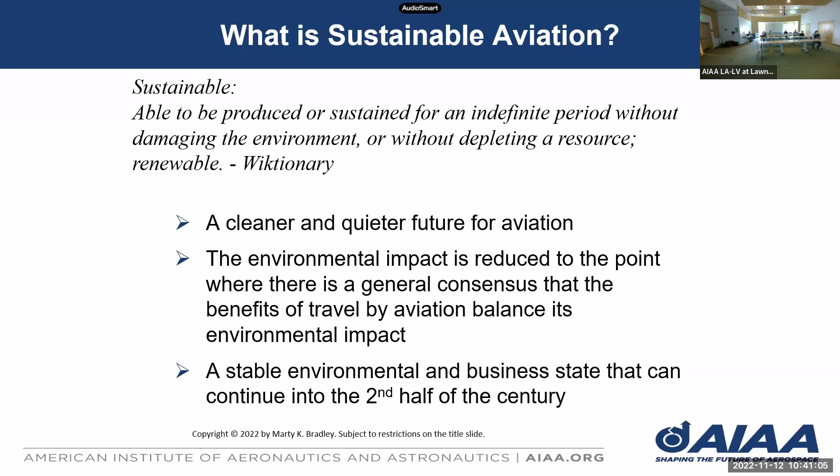Things like flight shaming are real, right? People are out there saying you should not be flying, it's bad for the environment. There's a lot of truth to that, and we'll get into some of that. The pressure's there, you see it in the news every day. There's a worldwide climate summit as we speak, they're setting goals, they're trying to figure out ways to reduce the environmental impact of everything, reduce CO2 and other greenhouse gases.

So a lot going on. Certainly plenty of pressure to say clean up our act.

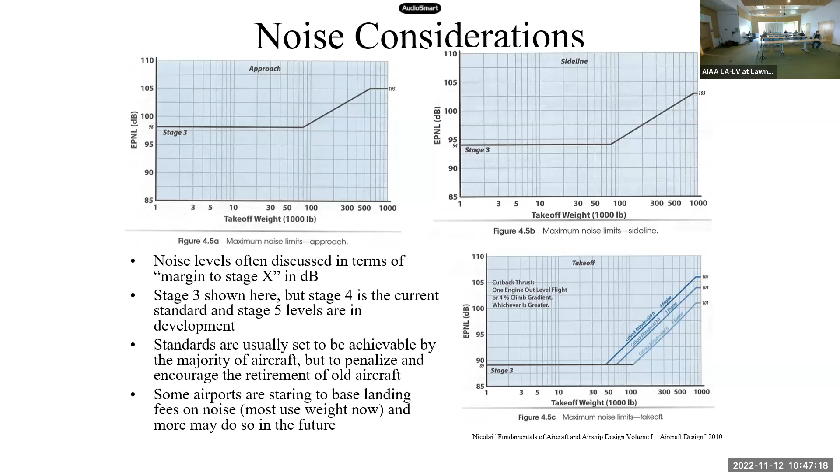Now we're talking about Chapter 14. So again, what they're doing is trying to essentially decrease the noise of the fleet. They usually do that by only identifying a few noisy outliers and putting those above the line, so they're not trying to force the entire industry to swap out their entire fleet, but trying to get rid of the noisiest airplanes over time. That's what happens when you have an industry group setting the standards.

There are some individual airports that can set more stringent standards and require other things - like Orange County Airport has additional restrictions. Some airports restrict the time of day that airplanes are allowed to fly. So there are more things some airports can do, but generally these are the rules.

So new airplane design now is going to have to meet this - going into service would have to meet this Chapter 14. And there'll be another one, right? They'll get quieter as older airplanes die out in the future, so there'll be new noise standards.

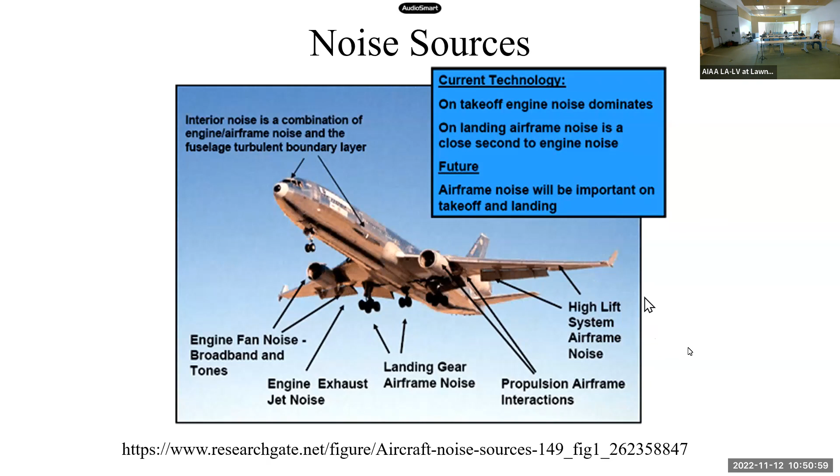There's a lot of noise from the difference in two velocity streams against each other. So if you can mix it out, then it won't be making noise anymore. So you see these kinds of features on jet engines.

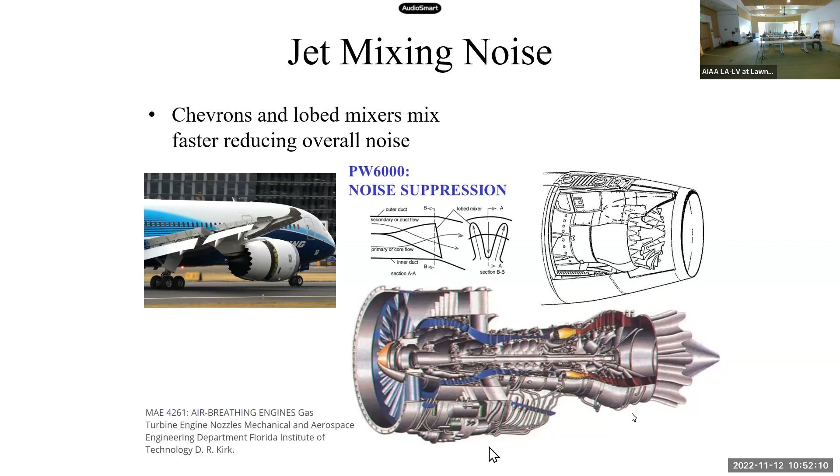Interior noise is important. There are communications that have to go on in the cockpit. The pilots have to be able to talk to each other. In the cabin, passengers want to be able to have maybe not a completely normal conversation, but some kind of conversation that goes on. You need to make public address announcements. Even though flight attendants are great at reading lips and things, it helps so they can actually hear you,

as well as it's just more comfortable to not have a lot of noise. Some of the sources of noise inside the airplane come from the outside, the flow around the outside of the airplane. The engines, obviously, are a source of noise. The air conditioning system inside an airplane, the flow of the air circulating in the cabin can also be quite noisy. Those kinds of things.

Okay, so just a little bit on how the noises vary. We'll see if this works. We've tried some of the audio-visual things, and we tested this out and looked a little bit earlier. We'll see. But this is the difference between a fan and a propeller in terms of the kinds of noise it makes. If you're a noise expert, you get very good at hearing the different frequencies and understanding what they are. But for the rest of us, it's kind of a black art. But let's show you a couple of examples.

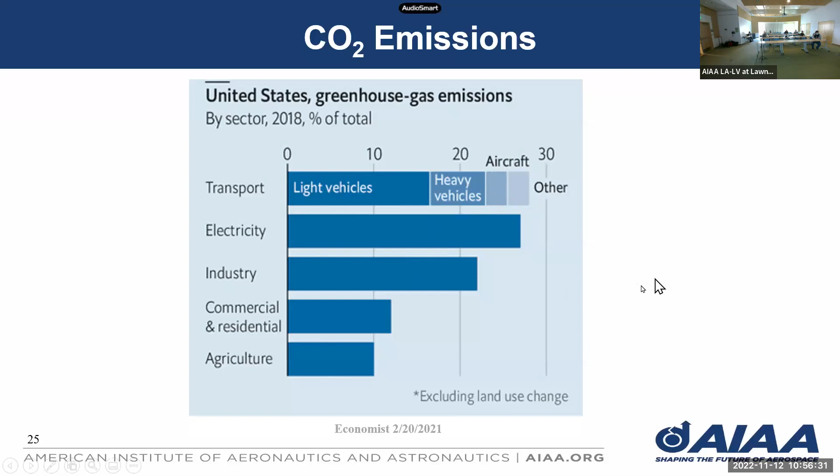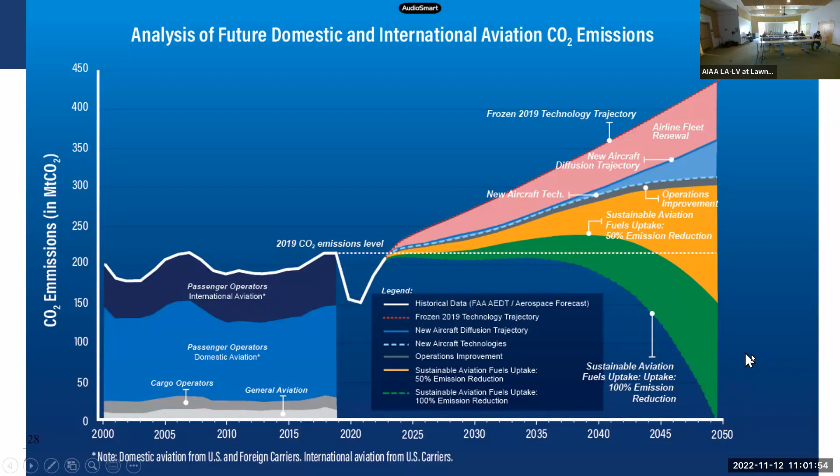Other developing countries are a big deal as well, so everyone's got a part to play. I think that's the theme they're trying to talk about at the climate summit they're having currently. Lots of things going on, including poor developing countries wanting rich developed countries to help them pay for becoming more environmentally friendly and fuel efficient. So a lot of things going on, but you certainly need China and the U.S. and everyone to do something. Everyone's got a role to play in this. It won't be successful if any of the big players are not fully engaged.

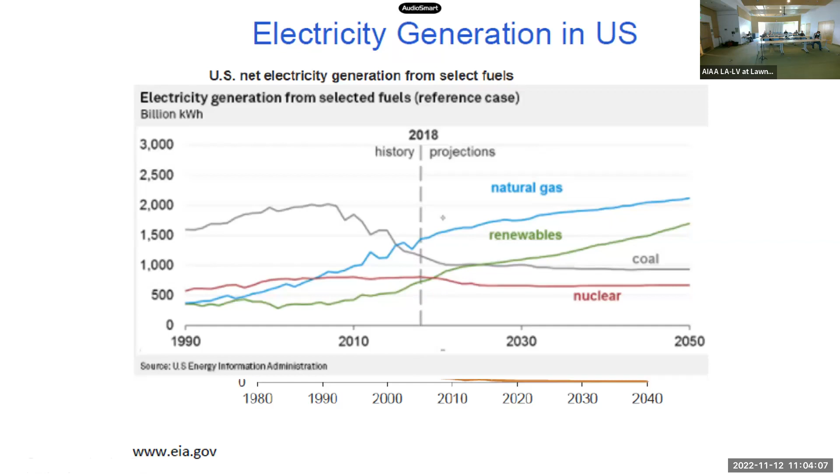If nuclear could ramp up, that would help some of these other things. But that's kind of the way renewables look. I think the next slide zooms in on renewables in the U.S.

One of the important implications over time is the cost of all these renewable energy methods of generating power have come way down, so renewable methods are now cheaper than conventional methods. That's a really good thing to have happen. You can argue that developing countries, it makes more sense for them to skip over coal and other highly polluting things and go directly to solar and wind. The issue being, how do you make a stable electrical grid when the sun doesn't shine? There's a lot of issues involved in that.

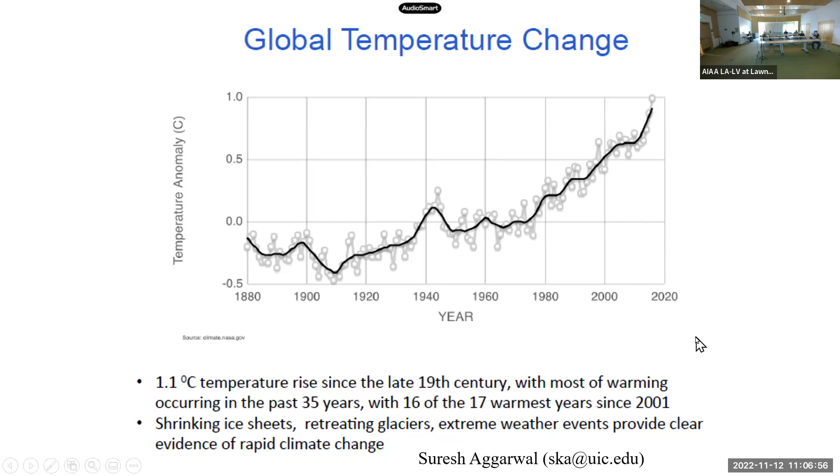We all talk about CO2 all the time, but it's not only CO2. CH4 is methane—that's also a contributor to greenhouse effects, to the rising temperature. We have...

One of the things they mentioned at the climate summit, I think yesterday or the day before, is the US is using their NASA satellites to identify methane leaks and emissions, which they will then try to stick somebody on to try to reduce the leaks, improve efficiency, those kinds of things. So it's mostly CO2, but the other ones can be important as well.

And there's different time frames, which we won't get too much into, but methane does not stay in the atmosphere as long. Carbon dioxide stays 100 years or more. So it's the hardest to deal with.

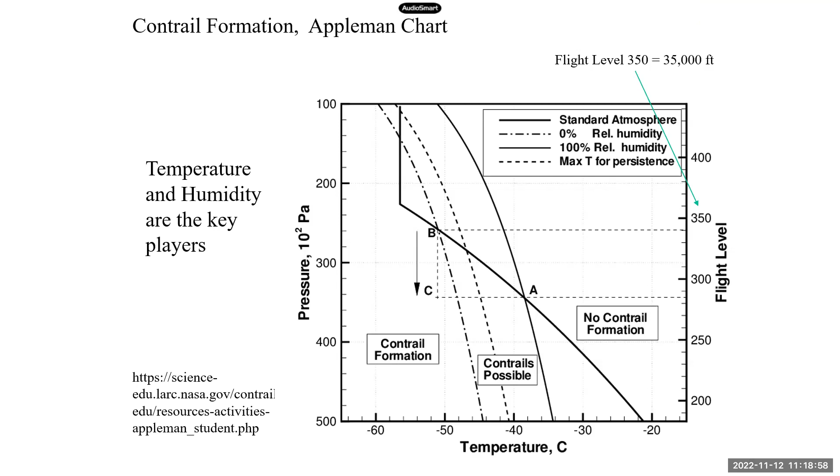Mr. Professor, what do you think about third generation microalgae in the oceans? We can think 3D, right? Excuse me for my English. Can you repeat the question please? What do you think about the third generation of microalgae? Sequestration of carbon in the ocean? Yes, in the ocean. We can think 3D, no?

Microalgae, yeah, I think we'll talk about that a little bit more later. That's one of the non-aviation ways of reducing CO2 in the atmosphere. If you use algae to capture carbon, when algae grows it's going to suck in CO2, and then you can use that as a feedstock for sustainable aviation fuel. So that's a possibility too. We'll talk about that.

Okay, let's see if this plays. We're not quite sure, this doesn't work. These are some videos of contrails and contrail activity. Thanks, sir.

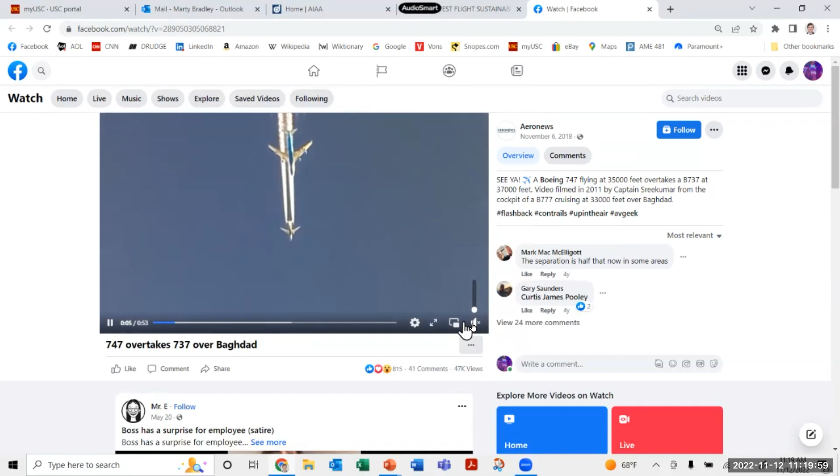Two of them, no? It's a 747. See how the guy is, yeah.

What we have here is someone in a 777 airplane taking a video above him, and there's a 747 and a 737 above, and they're making contrails. Here's an example of contrail formation, and the conditions are such that they're forming these contrails. One of the interesting things is how excited the pilot is. He's probably a 20-year experienced pilot, and he's seeing this, and he's pretty excited because it's very rare that you're going to see multiple airplanes all stacked up on top of each other. That's kind of fun.

That was one of the rarest. Okay, so, all right, and then here's another video. This one, if it works, we'll see how this works.

Okay, so I'll stop it. What you see here is two airplanes again. It's being viewed from another airplane, but this airplane is coming at us. The contrail does not persist. If it flies by, you can see the contrail dies. So it's an example that some of the contrails do not persist. It depends on the conditions, and these are all the things that you need to calculate to figure out if you're forming a persistent contrail.

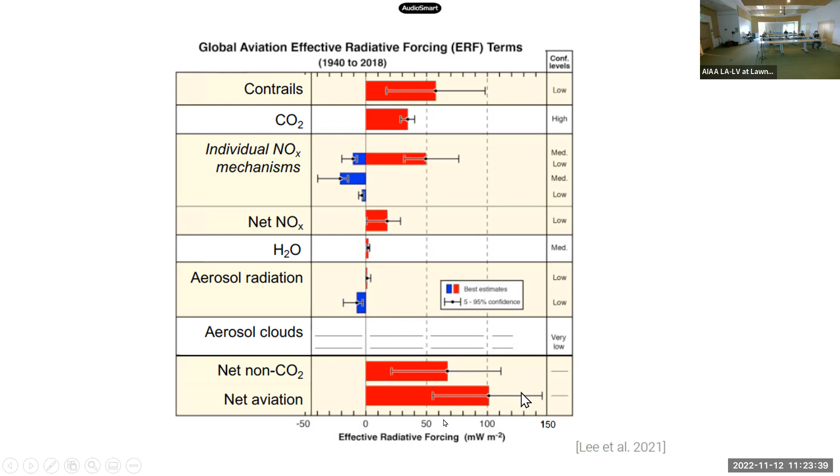The other thing that comes into play is a lot of short-range flights. If you're flying a few hundred miles, they may not ever get to the altitude where a contrail is going to be formed. So that would say some of the shorter-range flights, LA to San Francisco, maybe is not going to form as many contrails as a flight that goes across the Pacific, for example, which will fly at a higher altitude. So those are all things to consider.

This is one of the really good papers that was done relating to aircraft design and reducing the impacts of global warming. They called it global warming in 2011; now they would say climate change, most likely. A commercial airplane is typically designed to fly at Mach 0.85 and cruise at 37,000 feet.

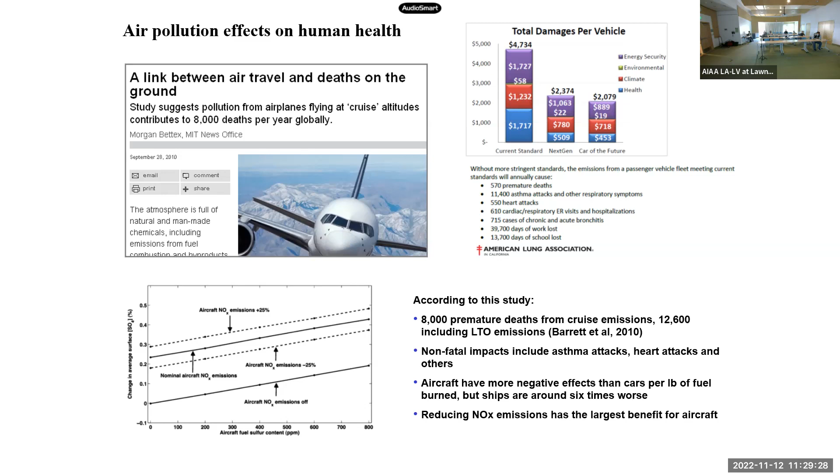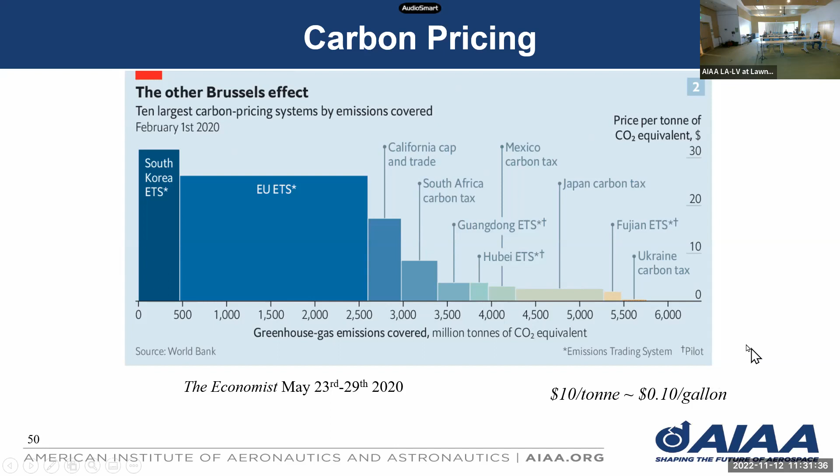Okay, so just an exercise. You may hear numbers flying around. One of the values I've seen recently is $30 per ton of carbon. What additional cost is that on a gallon of jet fuel? If you run through the calculations, it turns out that's about 30 cents on a gallon of jet fuel. So $30 per ton, or $100 per ton of carbon, is about $1 a gallon tax on jet fuel. And we're not at that level yet, so 30 cents isn't that big an impact. But in order to start changing the price of jet fuel, these carbon prices probably need to start—when they get higher, they'll have a bigger effect.

But some of the things you may see—there's a lot of work on different tax credits. There's taxes and credits, and all these things are being worked in different ways. A lot of policy activity related to sustainable aviation fuel. The current administration is pretty prone to working on these things, building these kinds of incentives into the Inflation Reduction Act and the other spending they put out in the last 10 years.

Let's talk a little bit about some of the technologies that we looked at. This is from one of the studies we did for NASA, called Subsonic Ultra Green Aircraft Research. We defined baseline airplanes in the 2005 timeframe, an improved version with new technology from 2030 to 2035. We looked at different wings, increasing aerodynamic efficiency, different shapes, and adding hybrid electric propulsion. Then we looked at even more advanced technologies that might be available in the 2040 to 2050 timeframe. So these are some of the things we looked at.

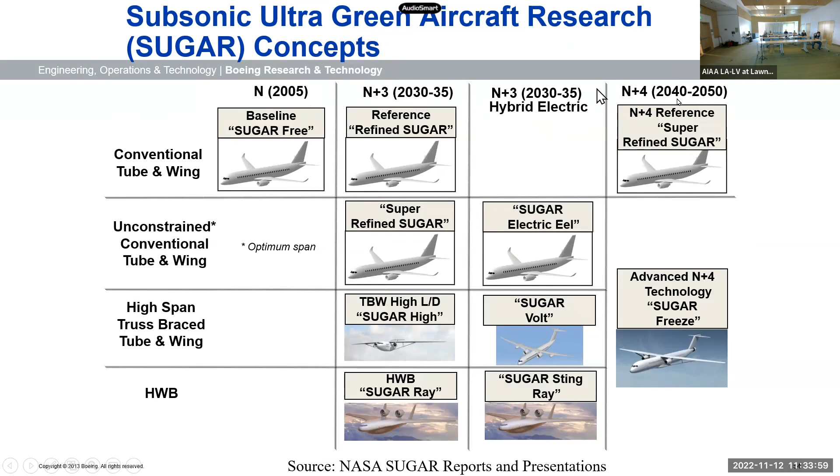And we defined these terms: N+3 is the time frame of 2030 to 2035, N was the time period of 2005, and N+4 was 2040 to 2050. So you'll see us refer to that.

But for some of the technologies beyond the N+3 technology, we looked at things like natural gas, liquefied natural gas, hybrid electric propulsion systems, advanced batteries, fuel cells, hydrogen, hybrids between fuel cells and batteries, and fully electric airplanes to try to do some of these missions. We've even looked at what you would do if you wanted to fly a nuclear reactor in an airplane, something looked at during the Cold War—what would have to happen to make that practical. I won't be talking too much about that; it has to get very light and very safe before that can apply.

We looked at some of these technologies in our different studies. We came up with these cute little names, like the Sugar Volt, the Sugar High, the Sugar Freeze. Those are some of the different things we referred to.

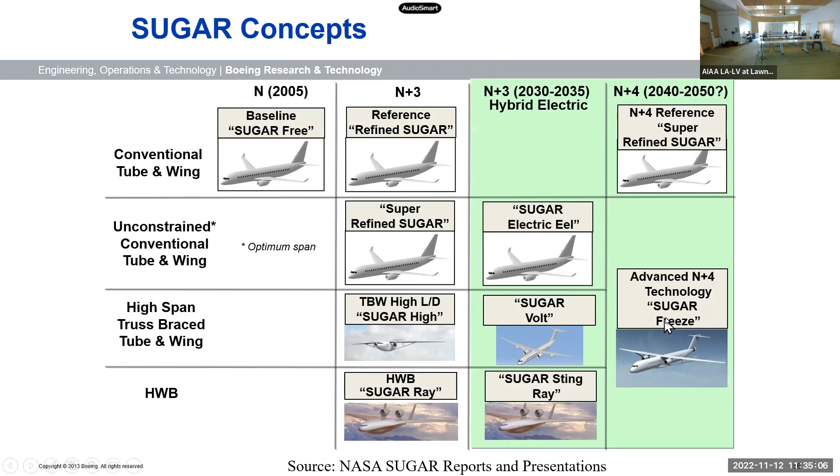Okay, so a little bit on fuel. Some of you know more about this than I'll show here, but the fuels are all about, let's review our chemistry a little bit. Hydrocarbon fuels are molecules that are mostly chains of carbon with hydrogen attached, and we'll see some of those. Carbon is relatively heavy with an atomic weight of 12, and hydrogen is the lightest with an atomic weight of 1. The energy you get by combusting one of these fuels, combining with oxygen, creates water and CO2. That's what releases the heat.

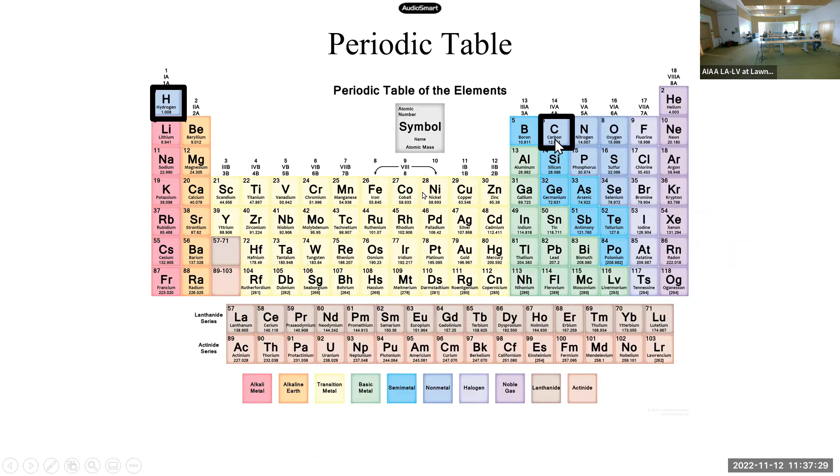So in deciding, if you're trying to develop something for aviation and moving toward hydrogen, hydrogen has good energy, it's lightweight, but it takes up a lot of volume. So that has a lot of impacts to the aircraft.

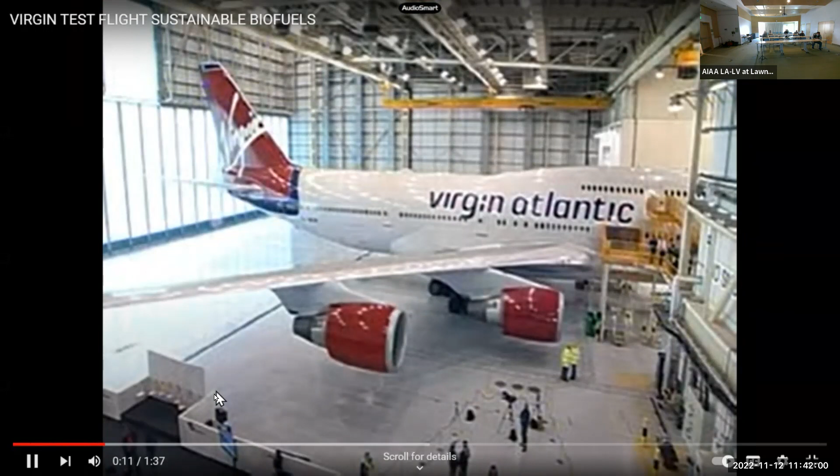It's a historic occasion. The Virgin Atlantic 747 behind me will fly using a biofuel that will come as a surprise to many around the world. Well, we've had a wonderful day today. We wanted to prove that a biofuel flight could take place, that a plane could fly at 30,000 feet on biofuel. People have always said that would be impossible. That has happened. And it's a historic day. We've committed to putting 100% of the profits from our airlines and our train businesses into trying to develop clean fuels, because the globe is being destroyed, and we've got to do something about it. Biofuels is one possible answer. Biofuels do not emit carbon. So over the last 2 years, we've been trying to prove the skeptics wrong. The airline industry emits about 2% of the carbon, and the carbon...

All right. I mean, a couple things, right? That was the first biofuel flight in a commercial airliner. It had a small amount of biofuel made from a babassu nut and some other things in it. Richard Branson exaggerated the benefits in some ways. He misstated maybe the chemistry a little bit.

Biofuels emit carbon because they are hydrocarbon fuels. When you burn them, you get carbon dioxide. We'll show though that the net carbon dioxide could be much lower.

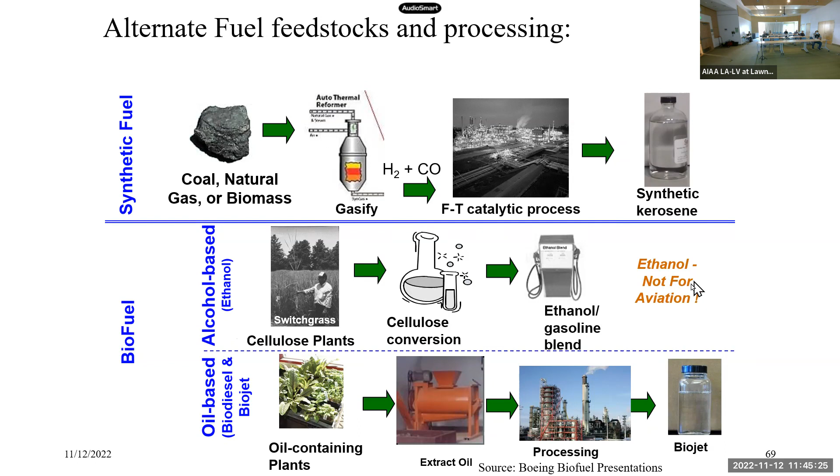I won't talk much about this. You can make an alcohol process—you can use ethanol and convert it into something that you can mix with gasoline. One of the problems with that is it doesn't take well to low temperatures that aviation needs, and the energy content is pretty low. So not many people are talking about using any kind of alcohol in aviation.

The Fischer-Tropsch process is mostly about what you'd think of really big refineries having—you've got the towers, you have tanks, you have all this stuff. It's processed in many ways. You're essentially making carbon monoxide and hydrogen, and combining them together into the fuel that you want. So it works, it's a well-proven process. It requires a lot of energy to do it.

And so we'll look at some of the comparisons. You can make a fuel using this process. If you start with biomass at the beginning, it's not nearly as bad. If you start with coal at the beginning, you're doing an environmental disaster, basically, if you're using coal to make some kind of jet fuel.

The advantage of using some kind of sustainable fuel from biomass is this: typical petroleum-based jet fuel, you pull it out of the ground, you transport it, you refine it, you take it to the airport, you fly it, you emit CO2, and all the energy used along the way to get it there essentially is more CO2 ending up being used. In a sustainable aviation fuel, you start by absorbing CO2 from the atmosphere into the feedstock, into the biomass. Then you refine it, process it, fly it, and burn it, and the CO2 comes out.

But you can argue it's a circular system and a lot of the CO2 gets absorbed again—maybe not the same CO2, but in the whole world it doesn't make any difference. The inefficiencies of each process mean that energy essentially is being used; it had to come from somewhere, so that could create CO2 itself. It's impossible for this cycle to be 100% efficient because all these steps have some inefficiency.

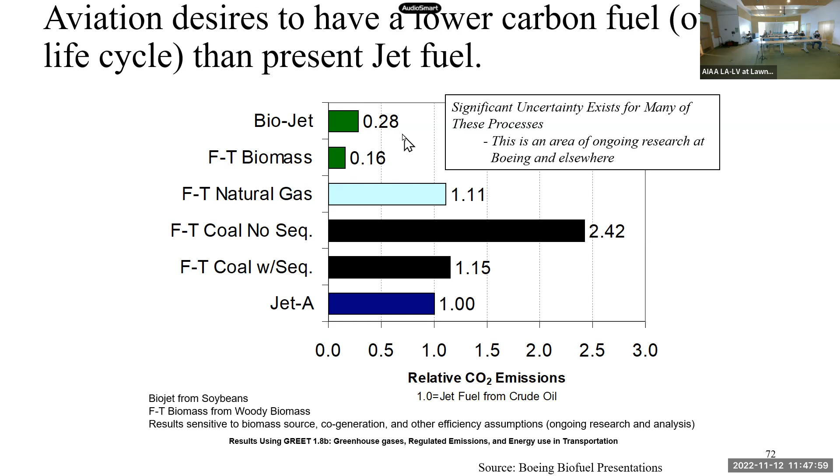Here's some comparisons of different ways of producing jet fuel CO2 emissions, with Jet A at the bottom using 1.0 for 100%. These Fischer-Tropsch processes with coal are terrible. Natural gas is worse than jet fuel. The biomasses are the ones that have the potential to really improve it.

Whatever you're doing, you can't have people cutting down the rainforest in order to grow this stuff. So deforestation is a big deal—about 25% potentially of global warming comes from deforestation. You don't want that to happen, so you don't want to do anything that encourages it.

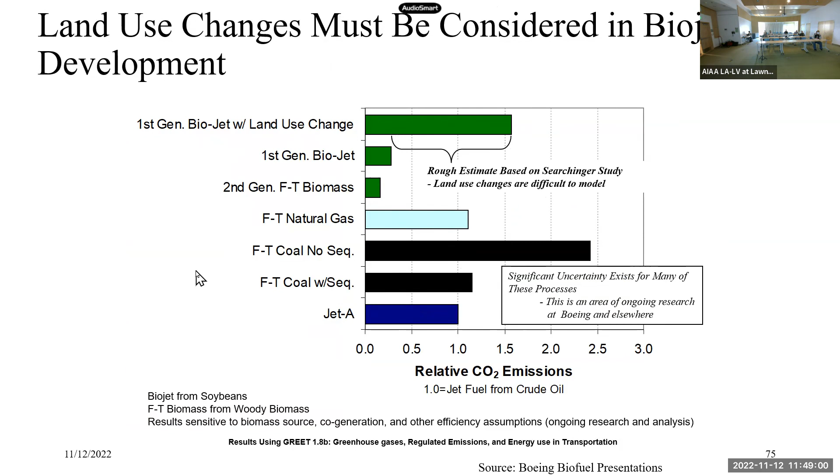We also looked at a saltwater plant you might use. You'd need something like the size of France. Still looks kind of tough.

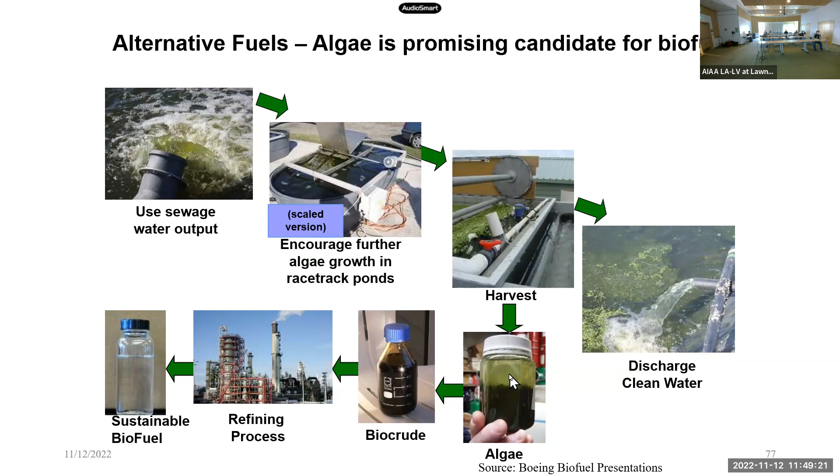Another thing we looked at is algae. Algae is a way you grow it in water—maybe bad water, maybe wastewater or salt water. That seems pretty good. You can create this and refine it into sustainable fuel.

Some studies showed if you had offshore algae farms, you might be able to get by with an algae pond the size of Belgium to handle all of aviation, which is starting to get not quite as crazy. Obviously you wouldn't put algae all over Belgium, but you'd spread out algae farms around the world in different places. So it's getting to be something that might be more practical.

And so like I said, the analyses people have been doing are showing up to about 80% reduction in life cycle CO2, which is why people are interested in sustainable fuel.

Virgin Atlantic on Sunday carried out the world's first flight of a commercial aircraft powered with biofuel, consisting of coconut and babassu oil. Not to be outdone, Continental is fueling its planes with 'I Can't Believe It's Not Butter.'

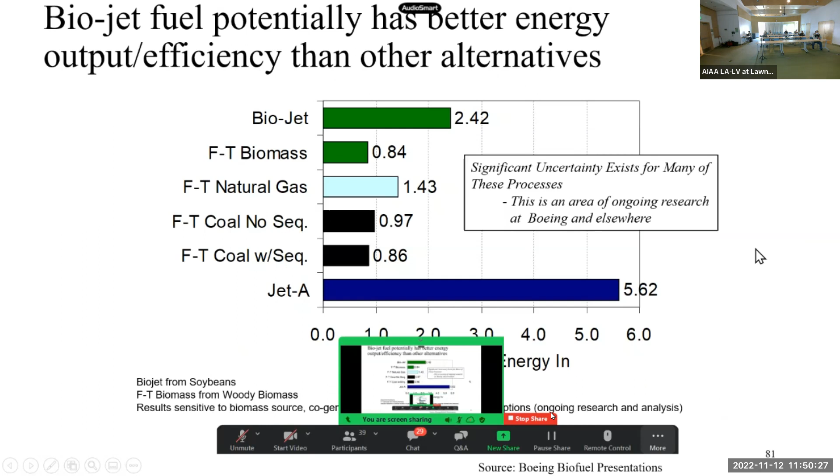So it's pretty fun when you're working on technology in aerospace and it ends up being a joke on Saturday Night Live. I consider that a highlight of my career. Okay.

Current biofuel status: multiple pathways have already been approved by regulators for blending 50% with conventional jet fuel. The reason they're blending 50% is to make them backward compatible with all airplane exhaust and fuel systems without having to do any limitations. You'll see.

They don't have too much biomass, since it's less than 1%. There's still problems with the supply of biomass that goes into this. Algae is expensive, and with crops we have to worry about competition with water, food, and land use.

Saltwater plants are still having issues. One of the most promising areas is processing municipal waste instead of sending it to the landfill, it's going into jet fuel. There's significant activity in the Los Angeles area and around the world, but the supplies are limited, though there's a fair amount of it.

There's a high interest in using these biofuels in supersonic aircraft to reduce their environmental impact. They use so much fuel, they'd love to be able to claim that they're more environmentally friendly.

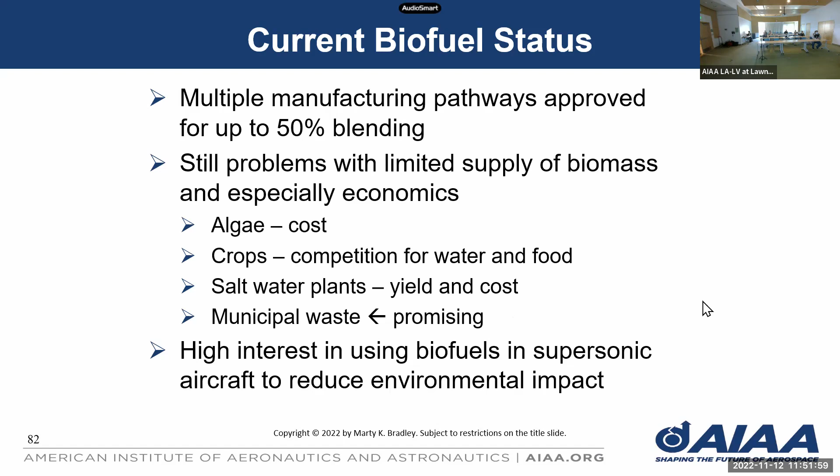LAX is one of the airports that has a fair amount of this sustainable aviation fuel from municipal waste, it actually goes into the tanks at LAX. United is involved with that. Every few weeks I see new contracts being announced, as well as plans for expansion of facilities to make this stuff. People are working on it really hard for the reasons we stated.

These processes are currently certified at different levels. The abbreviations are crazy, like many things in aerospace, the acronyms go kind of crazy, but there are different processes that have been approved by regulators around the world for use.

One of the new areas is called electrofuels. This doesn't use biomass, it actually uses water and CO2 pulled from a source, either the atmosphere or the exhaust of a power plant, and uses renewable energy to drive the whole process. They use that Fischer-Tropsch process I mentioned, which takes a lot of energy, but if you have sustainable renewable energy and a supply of water and CO2, you can make this electrofuel, another kind of sustainable fuel.

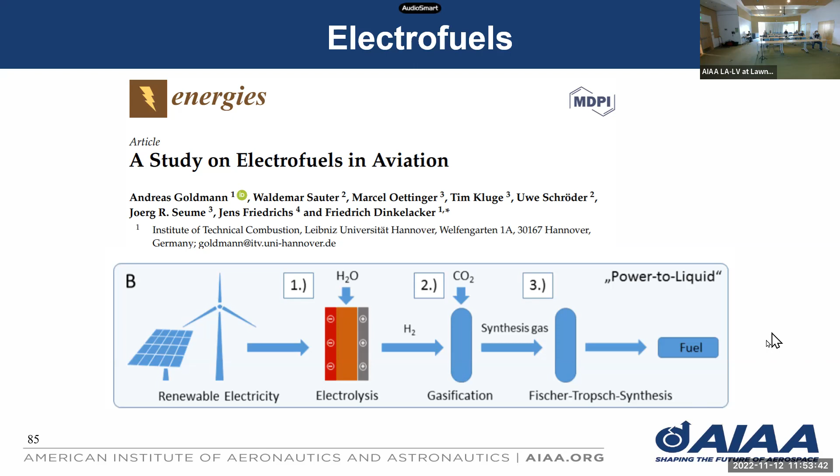There's a lot of activity in this area. It doesn't need biomass, so it avoids those limitations. People are starting to experiment and make these systems more efficient. The biggest issue is they use a lot of renewable energy to keep them environmentally friendly. Would we be better off using that renewable energy for something else instead, like the electrical grid directly? But that's another question.

This was discussed in the May 2022 edition of Aerospace America, which had on its cover 'jet fuel from thin air' - that's what they're talking about.

Another big development, which took them a while for reasons I'm not sure, is that Boeing and Airbus now say all new airplanes in 2030 will be compatible with 100% of this synthetic biofuel, the sustainable fuel, and won't need to mix them with conventional jet fuel at all. That's coming, so that's a good development.

The supersonic folks are trying to be as green as they can. Here's a picture of a supersonic airplane, and this is a bank of collectors sucking CO2 from the atmosphere and turning it into that electrofuel jet fuel I talked about before. But it turns out this company is out of business, I think, and there are still a few others out there working on it.

It's a whole other question for another day whether supersonic aircraft are environmentally friendly - the answer is not very, but it's complicated. If you want more information, GREET is a tool from the Department of Energy used in this life cycle modeling. The Commercial Aviation Alternative Fuels Initiative has spearheaded getting a lot of these things approved, working on this technology for 15 years or so, bringing together regulators, industry, and academia - a good source.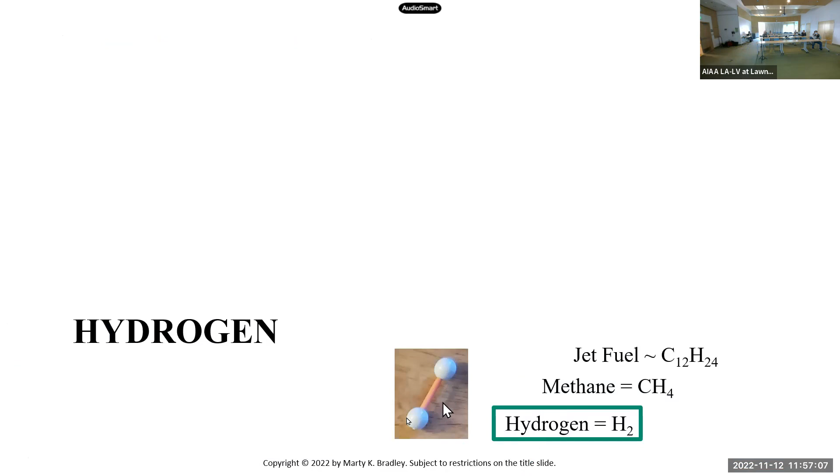Okay, let's talk about hydrogen. Everybody's talking about hydrogen, everybody's excited about it, lots of activity. Here's the molecule for hydrogen - very simple, two small hydrogen atoms. That's what hydrogen looks like.

Here's an old study we did on an airplane. You took an airplane that carried 133 people, which is kind of small, and put a hydrogen tank in the front and the back. You can see how much of the fuselage is taken up by that. But the airplane can be lighter depending on this, so we did some studies with that. The airplane would get bigger because it needs more volume - it wouldn't necessarily be heavier because hydrogen is lighter than jet fuel.

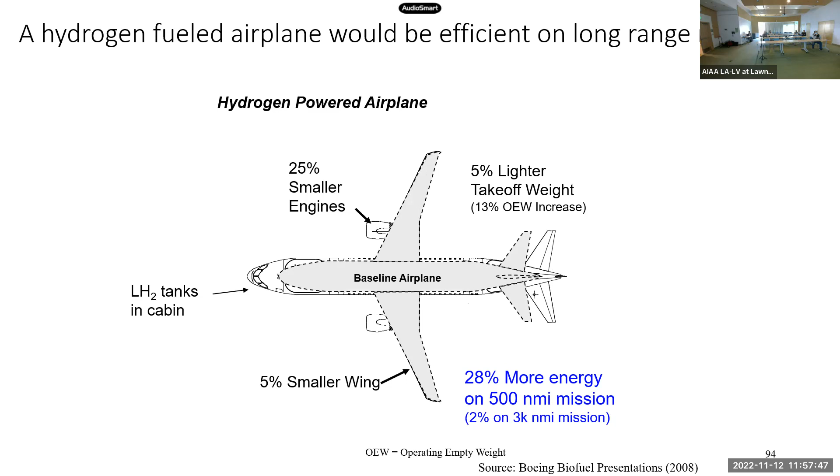The big advantage of hydrogen as a fuel is it has no carbon, so it produces no CO2. That's great. It does produce twice as much water as jet fuel, so that gets back to the discussion on contrails. Are contrails worse for a hydrogen-fueled airplane? We don't actually know if they're worse or not. We know there's more water, but we're not sure if they're going to form more contrails, and people are trying to figure that out.

Because we're burning it, we still have some other pollution - we have NOx, which is NO, created in a combustor. That still has to be taken care of. But there's no CO, no unburned hydrocarbons, and hydrogen is very clean. So the advantages of hydrogen are: it doesn't produce CO2. And can we deal with the water - that's the question.

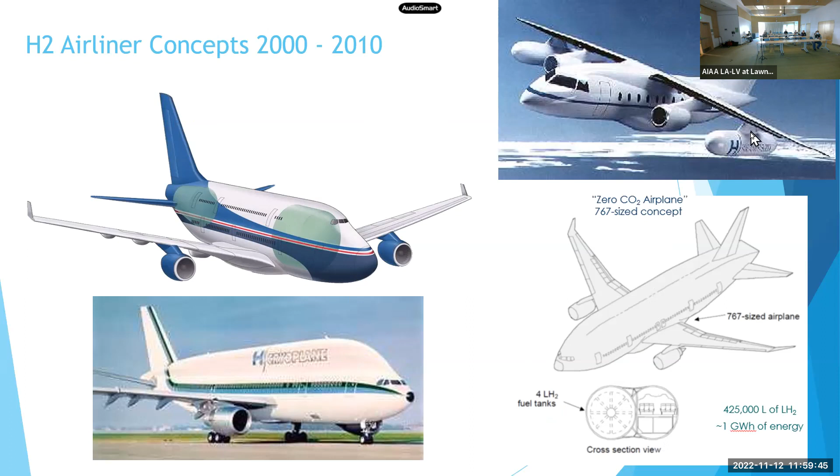Some of the different airplane concepts people came up with as they looked at hydrogen - here's one with a big hydrogen tank on top, here's one with four and a half hydrogen tanks, here's one where essentially one fuselage carries the hydrogen tanks and the other fuselage carries the passengers, and here's one with short range and big hydrogen tanks hanging on the wings. So these are some of the things people can look at.

Hydrogen is only environmentally friendly if you make it with renewable energy. Most of hydrogen today is made with natural gas in a steam reforming process. The carbon from the natural gas turns into CO2 as you're making the hydrogen, so the hydrogen comes out without carbon, but you've emitted CO2 when making it. That's the way most hydrogen is made today.

You will see all kinds - they talk about colors of hydrogen, a rainbow of things. Black hydrogen is making hydrogen from coal - oh my God, what a terrible idea, don't do it. Gray is how most of it's made, steam reforming of natural gas. Green hydrogen is made with electrolysis and renewable energy - that's really the only way to go. Blue hydrogen is where they take the CO2 created during the gray hydrogen process and sequester it, capture it somehow - that's a way to try to keep the CO2 from escaping.

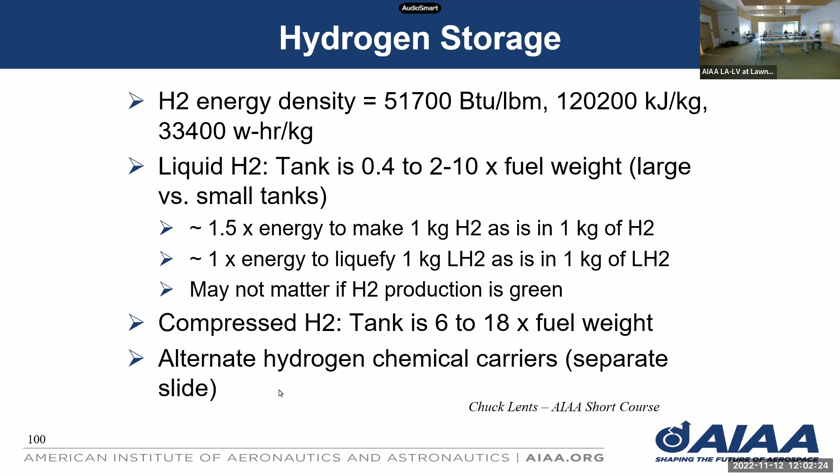And there are a couple other ways to carry hydrogen. But one of the things I've been tracking is the storage density - hydrogen weight over the weight of the hydrogen plus the tank. So if it's 100%, that means the tank weighs nothing, and it's all hydrogen. And 0 would mean you have a really heavy tank and very little hydrogen on board.

Right now, ground vehicles are somewhere less than 10% in this parameter, and they're fairly happy with that because it's not as important to them. Interestingly, large booster rockets and things like that are up around 70, 80, or 90%, but many of them are only used one time, and they're also very large, and the tanks are very light. So there are ways to carry hydrogen in a very light way.

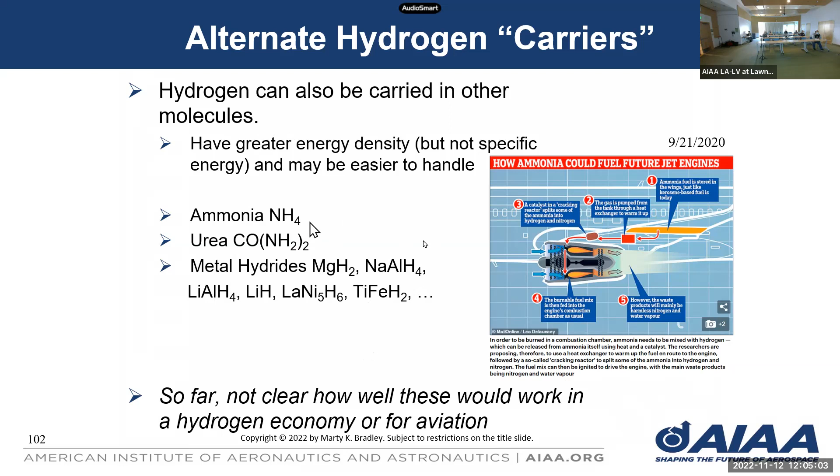Also, other ways to carry hydrogen - you carry it in other molecules like ammonia, metal hydride, different things like that. It's not clear that those are going to be a benefit, but there are other ways. Ammonia is NH3 - you're carrying along a nitrogen which doesn't help, but you still have hydrogens in there, and it packages more in a different way. So there's people looking at alternate ways of carrying hydrogen.

It's worth mentioning infrastructure is important for everything we've talked about. The aviation industry is very conservative when it comes to infrastructure. There are thousands of airports spread around the world, and most of them used for commercial aircraft can get jet fuel and refuel. If you have to divert because of a problem, you land somewhere else and get fuel. If you start changing to a different fuel, you now need that fuel available at any airport you might need to use.

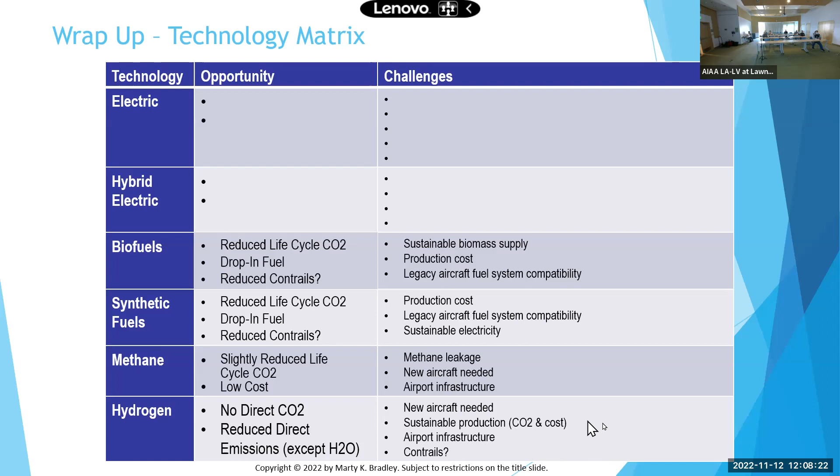The challenge is making hydrogen in a sustainable way that doesn't produce a lot of CO2, making it competitive on cost, and airport infrastructure. We also don't know yet about the contrail effects of hydrogen, so we'll have to see how that develops. This afternoon we're going to talk about electric and hybrid electric. If you want to stick around for that, we'll fill out the rest of this chart.

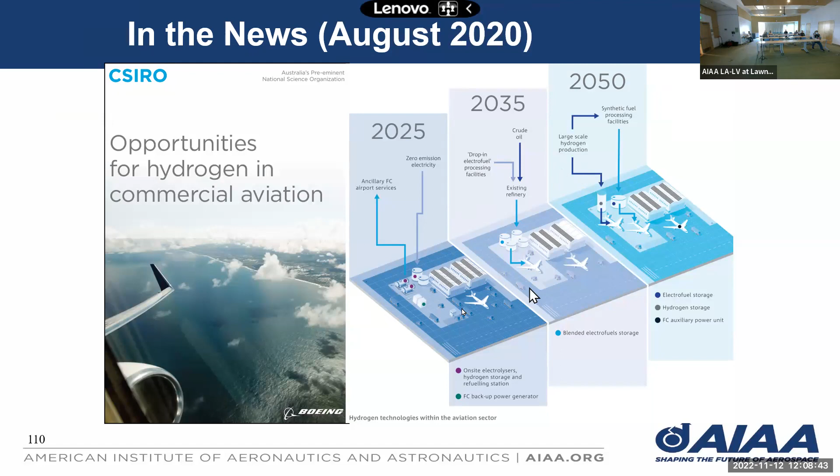In the news items, I'll probably skip this one. There's a lot of activity, including local activity, in the area of hydrogen aircraft. ZeroAvia is a company with operations in a couple of different places, including the UK and California. Universal Hydrogen also has a Southern California connection, another company working on hydrogen modules that can be plugged into airplanes. Airbus has a lot of activities too, looking at aircraft studies of larger airplanes with hydrogen. The UK's Fly Zero is another activity going on — you can see they're putting hydrogen tanks in different places on airplanes and doing airplane studies.

There's a book that's come out. It's got some good content — not as complete as I would like, but on alternate sustainable aviation there's some activity, with quite a few chapters describing that as an intro.

And then I think I'll wrap it up with this. Another thing I've been looking at, and others have too, is if we cannot get the climate under control and we need to do something to reduce the temperature, there are ways aerospace can intervene in something called geoengineering. There are a couple different ways. You could block incoming solar radiation using in-space reflectors to reduce the amount of energy hitting the Earth and reduce its temperature. Another approach is going up into the stratosphere and injecting aerosol particles that also reflect some of the energy back out into space. People are actually looking at this — it's fairly controversial, but it's another area where aerospace may end up playing a role in global climate change.

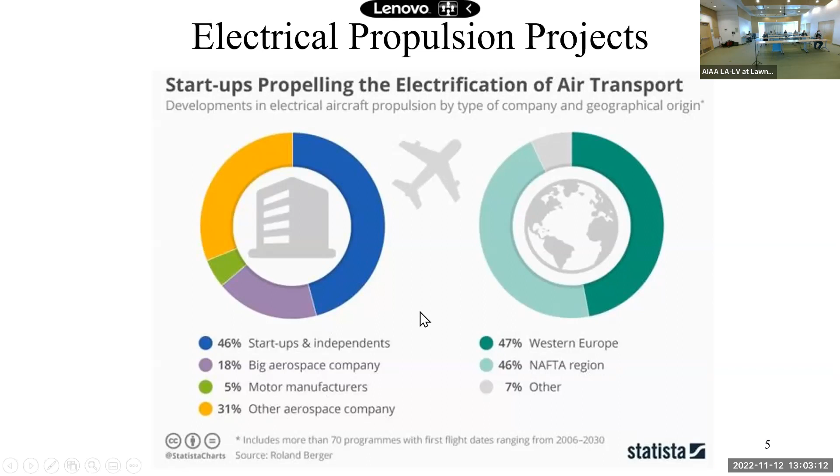There are many aircraft concepts and projects that have been worked on. The Vertical Flight Society keeps a database of all the different designs among their members and people not even in their organization. From 2017, they're up to 600 different airplane configurations. Certainly not all of them have flown—some are just ideas, pictures, or drawings, and some are variants on others. But the idea that there are that many different types and looks of airplanes out there in the electric aircraft space is interesting. There definitely will not be 600 distinct flying airplanes going into production—many, many fewer, but it's just interesting. We'll look at examples of some of the different configurations and powertrains.

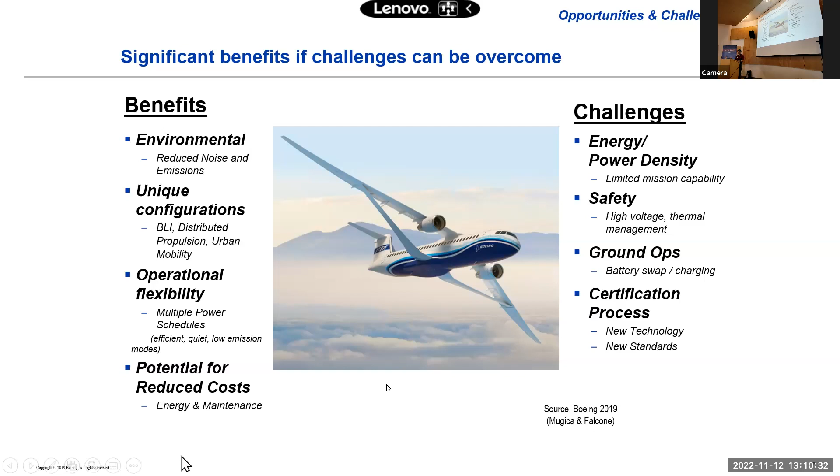Okay, first goofy example. We have an airplane called the SUGAR Free. Remember, it came from that study we did with NASA. It's like a 737 airplane, carries 154 passengers, can fly 3,500 nautical miles on jet fuel. It weighs 185,000 pounds and carries 60,000 pounds of jet fuel.

Jet fuel, Jet A, has lots of energy per weight. The units we're using here make it easy to compare to batteries - 12,000 watt hours per kilogram. So that's 60,000 pounds - we're mixing metric and English units, it's horrendous, but we're doing that. 60,000 pounds of jet fuel has 325 million watt hours of energy. Sounds like a lot.

If you use a really good lithium ion battery, it has about 300 watt hours per kilogram. So if you take 325 million watt hours and divide by 300 watt hours per kilogram, it would take 2.4 million pounds of batteries to reach the same energy as 60,000 pounds of jet fuel. That's the equivalent of 13 airplanes, the weight of 13 airplanes, in just batteries to have enough energy to replace that 60,000 pounds of fuel. So you're not going to just take an airplane, take the fuel out, replace it with batteries, and call it a day. That is not going to work.

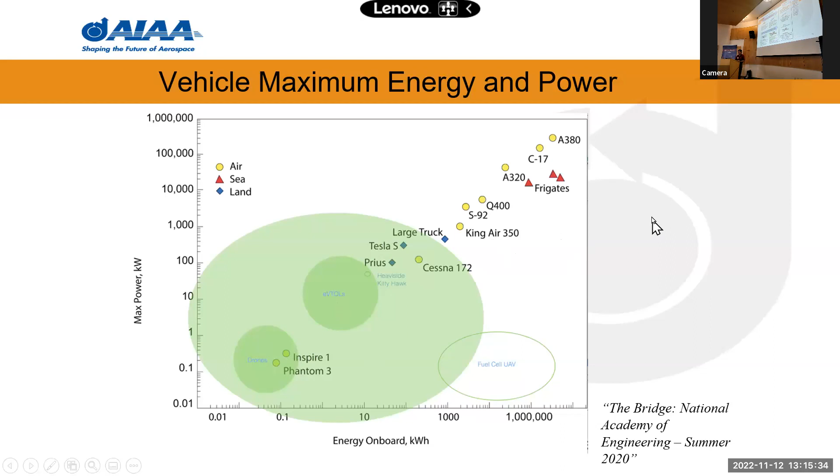NASA's a great source for information on this. They have websites. The best thing about NASA is their goal is to publish and share information. These small companies, and even the larger ones developing these electric airplane projects, are very secretive, very proprietary, very competitive, so you're not likely to get very much information out of them. They occasionally get a press release, a video here and there, but there's not much incentive for them to release a lot of detailed information, so you're not going to find much in the public domain.

But NASA has numerous activities going - test facilities, things like that. Similar activities in Europe going on, everything from very large airplanes to small general aviation airplanes, conventional takeoff and vertical takeoff kind of airplanes. So a lot of good information.

You have to get a little bit familiar with the power, the size of power, different things, and how much you would need. So a small 9-seat airplane might need 0.5 megawatts. It would use components that were 50 to 250 kilowatts each, and multiple ones together would add up to about half a megawatt of power.

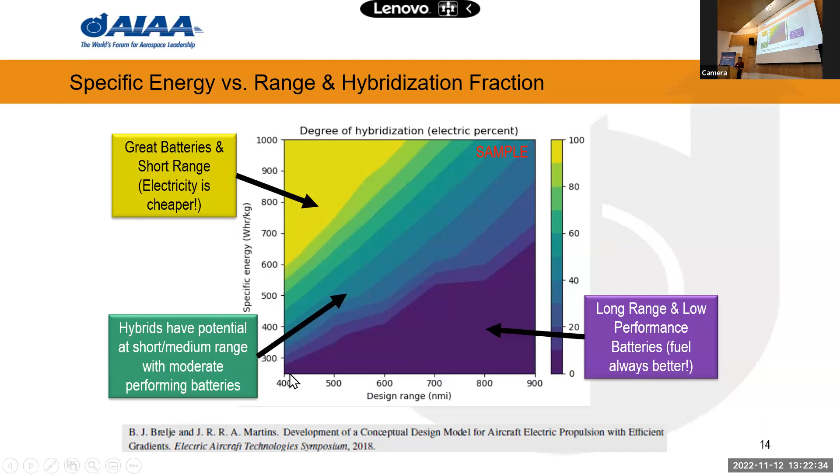All right, so some of the things that come up when you talk to somebody in the industry, or even not in the industry, about electric airplanes - one of the first things they say is they learned in their aircraft performance class that the fact that the airplane burns fuel as it flies means it gets lighter. So that's a big deal. And batteries, when you use the energy out of them, they don't get lighter. So that's a terrible thing in airplanes - electric airplanes can never work because of this effect.

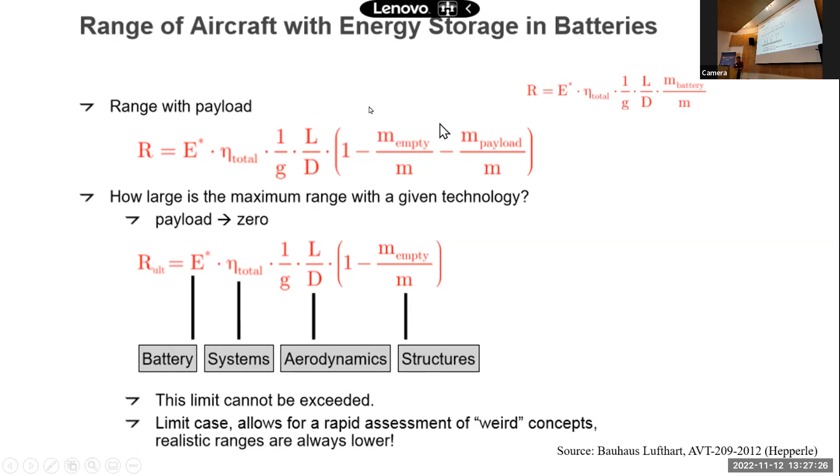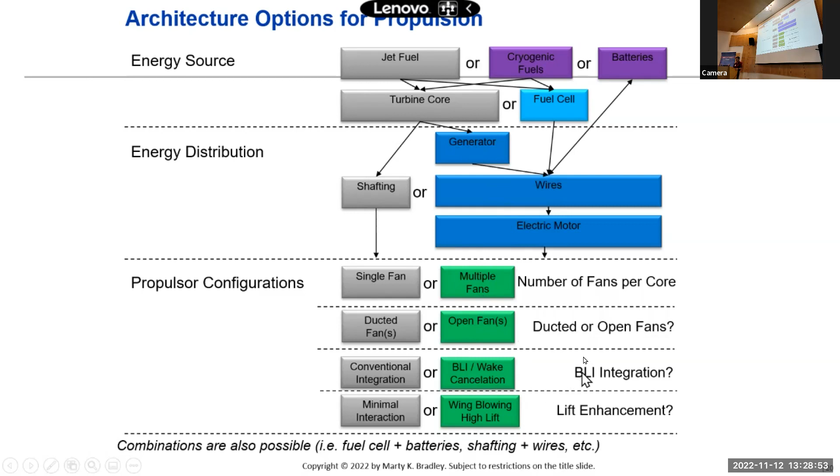You can also do various combinations, and go other pathways. The turbine can drive a generator instead to generate electricity distributed by wires to an electric motor. You could have multiple electric motors connected to that. You can have propellers or open fans instead of ducted fans. So these are the kinds of decisions you make along the way designing an airplane, and you're designing it to meet the requirements your customers have, so you pick these different choices.

And you can go through these and kind of their advantages and history behind the choices that have been made. For example, jet fuel, we saw before, high energy per weight, high specific energy. There's existing worldwide infrastructure. It's great. The challenges of jet fuel are, interestingly, crash safety. Jet fuel is inherently quite dangerous to work with. Aviation is so safe, not because jet fuel is a safe fuel necessarily, but because we were so practiced and experienced at making airplanes, fuel systems, and things like that safe.

We've worked at it since the Wright brothers, and airplanes are very safe, but they're safe because we worked it so hard. Carbon footprint, we talked about how sustainable jet fuel was, and at times, jet fuel is very susceptible to the supply of oil and global supply disruptions, so periodically that comes up as a major consideration. And the other fuels, we talked about hydrogen as a fuel and its advantages and challenges. Batteries, the biggest problem with batteries being they're so heavy for the amount of energy they carry, and they have other issues.

Okay, so pluses and minuses, and history of why people decided these things. We'll talk about a couple of these.

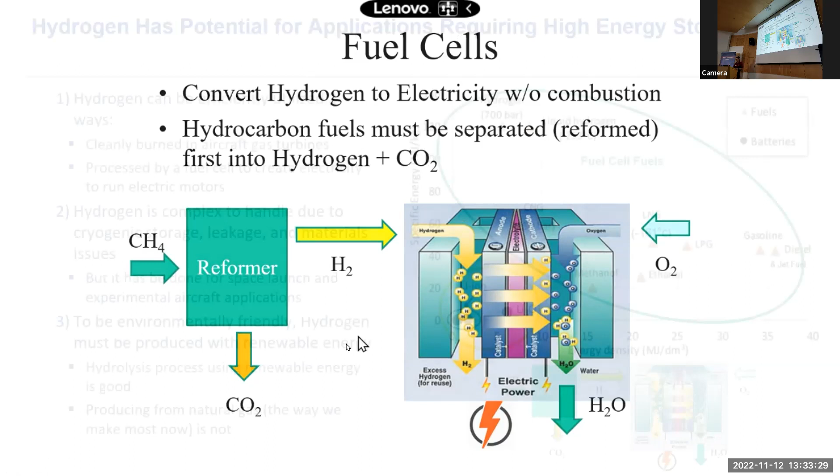And we showed this chart before, but I didn't talk about it too much. You can see all the different fuels—these will all work in a fuel cell. Natural gas, propane, gasoline, diesel, jet fuel, liquid hydrogen, compressed hydrogen, alcohols will all work in fuel cells. Batteries, like I said, right down here.

You can use the hydrogen in two ways—you can burn it, or run it through a fuel cell. I did a paper this summer talking about fuel cell hybrid architectures, how many ways you might combine fuel cells with gas turbines and batteries in a propulsion system for an airplane. We looked at some of those. There's no real earth-shattering developments in there, it's more of a catalog of different architectures.

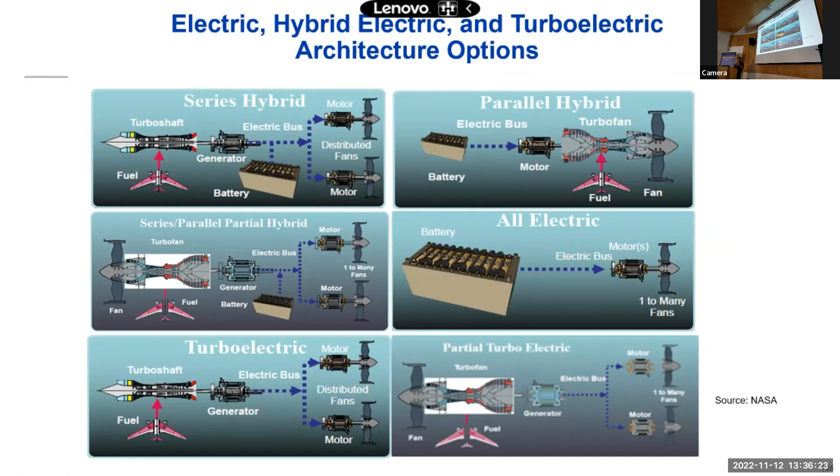There's a couple others. There's a series-parallel partial hybrid, which basically combines everything. And there's a partial turbo-electric, a little bit of a variant on that. So these are the terminology used for different architectures. We're going to do a few sample calculations to see what these things look like.

Remember that powertrain efficiency was one of the parameters in our equation for range, right? So we're going to track that a little carefully.

Across the top is a conventional airplane propulsion system, which we're saying is a turbine engine. And we're saying the efficiency of the turbine engine converting fuel into shaft power is about 50%. The number varies actually a lot. Small engines have a lower number, and the biggest engine on an airplane or in a power plant might be able to get up to 55 or 60%. It's like a thermodynamic efficiency, but 50% is what we're going to use here, maybe applicable to a small, medium-sized airliner engine.

Gearbox to match the speed of the fan to optimize its aerodynamics. Many new engines have gearboxes, not all of them, but 99%, very efficient. And then the propulsor, which in this case is like a fan or a propeller, is about 80% efficient. Maybe a propeller operating at low speed with variable pitch might be a little higher than that, could vary some, but we're going to use 80%. If you multiply those together, you get about 40%.

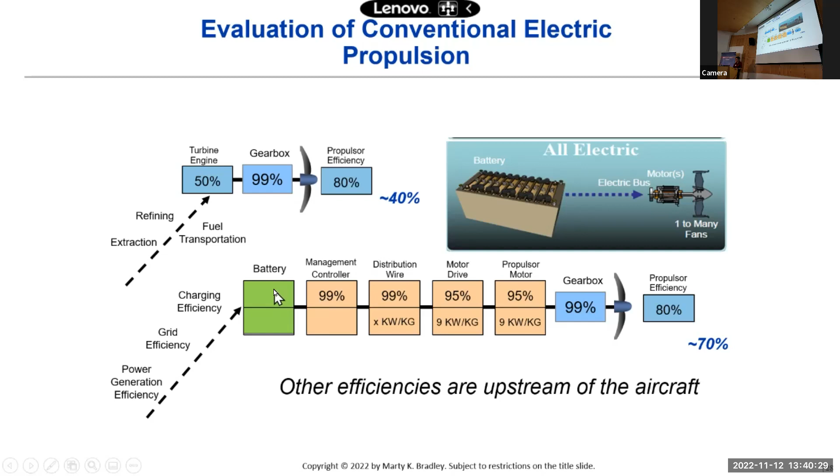But look what happened if we switch to this all-electric architecture. The question here is, we've added all these orange boxes. We didn't have the turbine engine, so we don't have that weight, but we have the battery. So it's not clear which one of these is really heavier. We haven't come up with an example that's defined enough that we can do that comparison, but batteries tend to be pretty heavy, so we want to balance that.

Turbo-electric system, we can do a direct comparison. Here's our conventional airplane propulsion system. And here's our turbo-electric system, where the turbine engine drives a generator. It goes through a controller, distributed on wires, to a motor drive, to a motor, to a gearbox, to a propulsor.

Multiply those out, we're at 32% to do the same thing we did at 40% here. We have these three components in blue, but we've added these five in the middle. So obviously this turbo-electric architecture has lower efficiency and more weight.

So why would you do a turbo-electric system? It has to be some other reason besides pure efficiency or weight. We'll see some options about why you might want to do that.

Parallel hybrids, right? A lot of activity. Some of the stuff I did for NASA was these parallel hybrids. They look kind of like this: a turbine engine driving a gearbox that combines two different power inputs as a propulsor.

It's a combination of what we showed before: 39% efficient across the top with a conventional turbine burning fuel, 69% across the bottom with this battery supplement to the system. What we do have is more flexibility to improve the system, because instead of just having a battery for all our energy, we can use fuel on long-range missions using this top part of the powertrain to achieve the longest ranges we need.

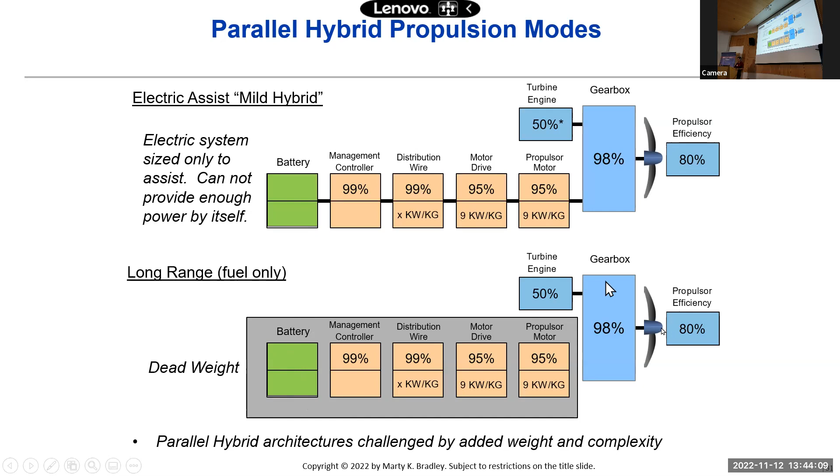In this case, you've designed it so you can shut off the turbine engine completely and run, say, just the cruise part of the flight on the battery. You wouldn't be making any contrails, and you don't have any emissions. Maybe some reasons to do that—you might want to be quiet.

What else can you do? This is kind of a different application. Because you've electrified everything, you can run the turbine to run a generator, which then generates a bunch of power you can use for high power systems. So if you're on a military mission and you want to, say, power a laser beam as you're flying over somewhere, and you need a ton of power to do that, you can use an architecture like this, potentially, to do that.

So these are some reasons why, even if it was heavier, you might want to have an architecture to do some of these things.

The partial turbo-electric architecture lets you, once you generate electric power, distribute it to multiple propulsors on the airplane. I'm going to show you what that is—it's called distributed propulsion. This kind of system lends itself to doing distributed propulsion with a bunch of different fans instead of only a couple.

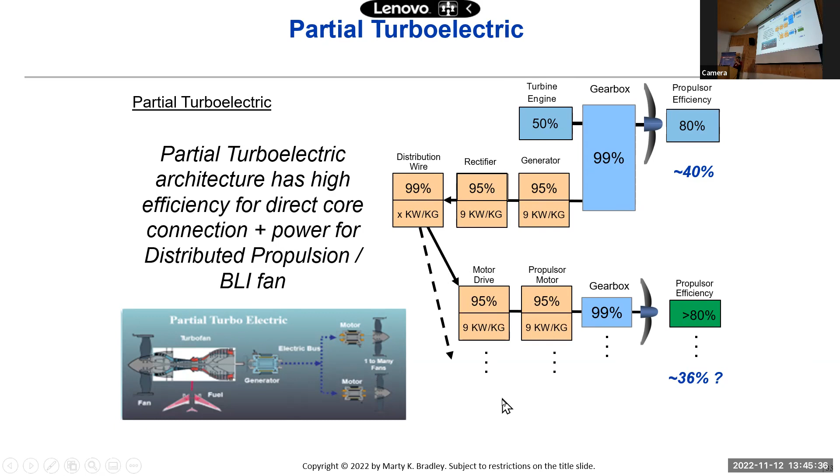We can do a quick evaluation of some of these things—the ways to do these distributed propulsion options with multiple fans. The turbine engine can do it: if you design a bunch of shafts to distribute the power with mechanically turning shafts, that's been done, and one turbine engine can drive three separate fans or propellers, for example.

One reason that might work is if you can distribute the propulsion and get them to be more efficient. We'll talk a little more about that, but that's one reason you might want to do it. If you can make the propulsors, the fans, more efficient than one big one, make 3 small ones more efficient, then you can actually get a bit of a performance advantage. 42%, we had 40 before with the old architecture. So maybe there's a bit of benefit you could get there.

You could also do the same thing with 3 small turbines instead of 1 big one, for example, smaller ones. The problem you get into is the turbines get less efficient as you make them smaller. So one reason why airliners have 2 big engines instead of 4 engines is because the bigger ones can be made more efficient as you scale up all the components.

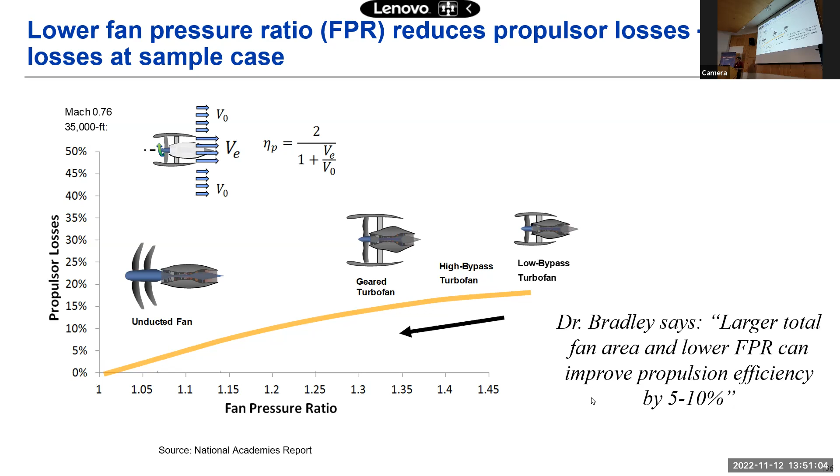So those are integration reasons - that's one reason. Another reason people are looking at some of these potential architectures.

One of the popular ones is turbo-electric distributed propulsion. This uses electrical wires to distribute power to a bunch of different electric motors arrayed across the aircraft. Remember, the problem is all these extra components add weight and reduce efficiency. So this can only look better if you're getting some gain in propulsion efficiency. You have to do something to get better propulsion efficiency to justify the extra weight, complexity, and losses that you have.

So a couple of exercises related to that, just a little bit more precisely what we looked at before. Here's the turbo-electric architecture: across the top it's 39.6% efficient, the bottom is about 31.9% efficient. That's the answer to the first part. Let's compare.

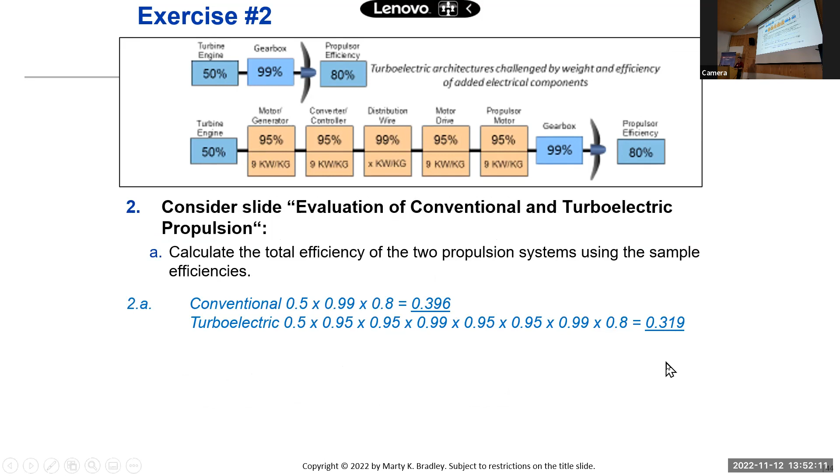This is a question of how much better the propulsor would need to be to have the same efficiency at the top and the bottom. We're chasing better propulsion efficiency, or better fan efficiency, for the propulsor. Turns out you have to have 99% to match what we have up here, which is pretty hard to do—not quite impossible, but pretty hard. If, on the other hand, we could improve the efficiency of these components to 99% instead of 95%, the break-even point becomes 84% in propulsor efficiency. So we go from 80 to 84—we've made up for this efficiency loss. We still haven't necessarily made up for the weight, so that's a separate calculation.

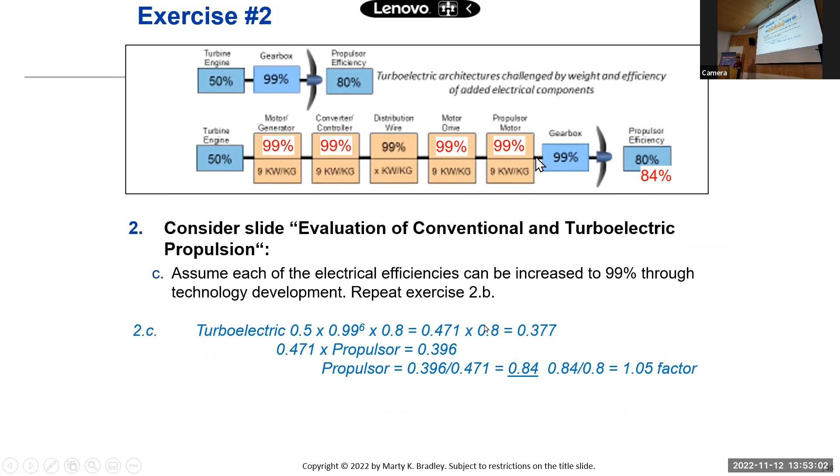Now, another point: everything that isn't 100% efficient here is actually inefficiency, and it's waste heat, most likely. The gas turbine engine, when it burns, is only 50% efficient. The waste heat is in the flow that you just burned, and it goes out the back—that gets the heat away from the engine and the airplane. You have to cool it, and there are things you have to do, but that's the main thing it does: it gets the waste out.

The gearbox is 99% efficient, but that heat has to be taken out by circulating oil through the gearbox. It comes out, and then the oil has to somehow exchange heat with something to cool it, to make that system work. So it's much harder to get rid of the 1% from the gearbox than it is to get rid of 50% from the combustor or the turbine. And the fan efficiency—that goes into wake.

So our electric system has a gearbox, but it also has all these 5%, 1%, 5%, 5% losses, and you have to do something with all that heat. That's a big deal. If you add it up, this system has 22 times the amount of waste heat that the other one has.

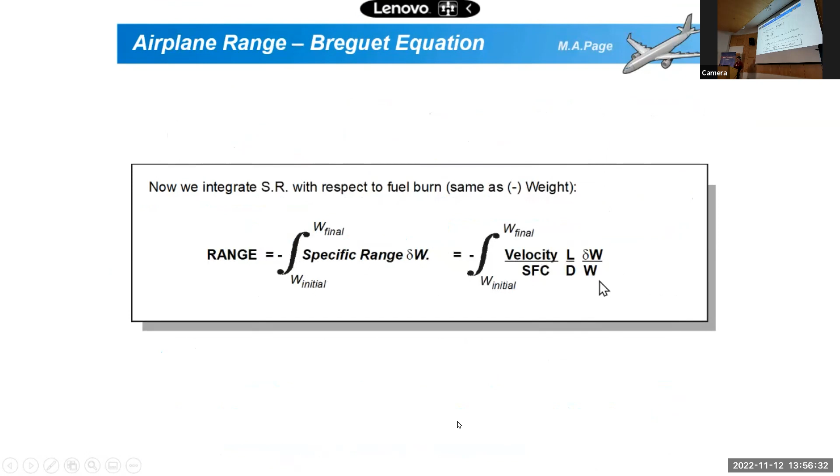The equation we talked about—does anybody like the integrals? No, nobody likes integrals. But this is the way the range equation starts, with the integral here. This is where that logarithm comes from by doing the integration. We showed a version of that before.

All right, so we saw these. We worked our way through these, discussing the different terms.

You can solve that equation in a little different way. M is the mass of the airplane. Pax is the term they use for passengers, so number of passengers times the weight of the passenger. You can solve the equation right in this form and look at doing different things with it.

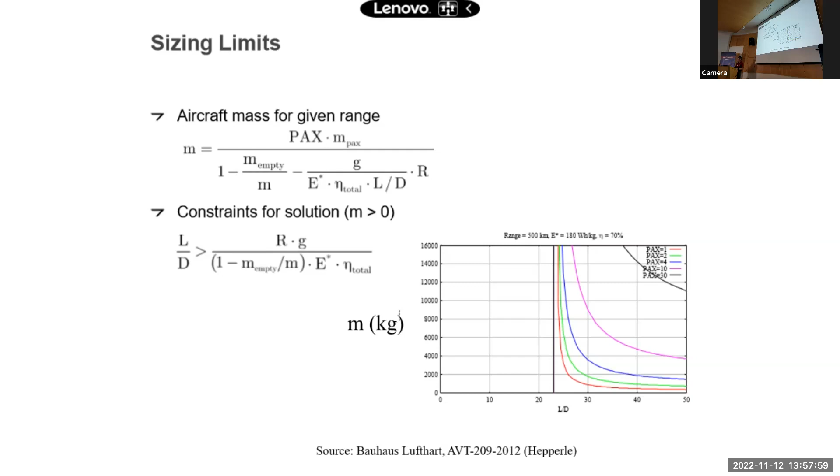You can take this equation and determine that for a combination of range, using 500 kilometers and 180 watt-hours per kilogram for the batteries, 70% efficiency, the lift to drag ratio of the airplane has to be at least like 22 to make any of these work and achieve this range with these assumptions. It's pretty high. So there are many combinations of range, payload, and efficiency that you cannot actually meet, depending on what you're able to do for efficiency. You can check some of the claims that people make about range and payload and all these different things by just using a very simple equation like this.

We're going to do an example with numbers I like a little better: 300 watt-hours per kilogram for the batteries, lift to drag of 15, 70% efficiency of the powertrain, 20% battery mass fraction, 55% empty weight fraction - that's the amount of weight you can add - and 1,000 kilograms of payload. So we're going to do some calculation. Found this online, you can go click on this, plug in the numbers, hit the button, and it will tell you the answer.

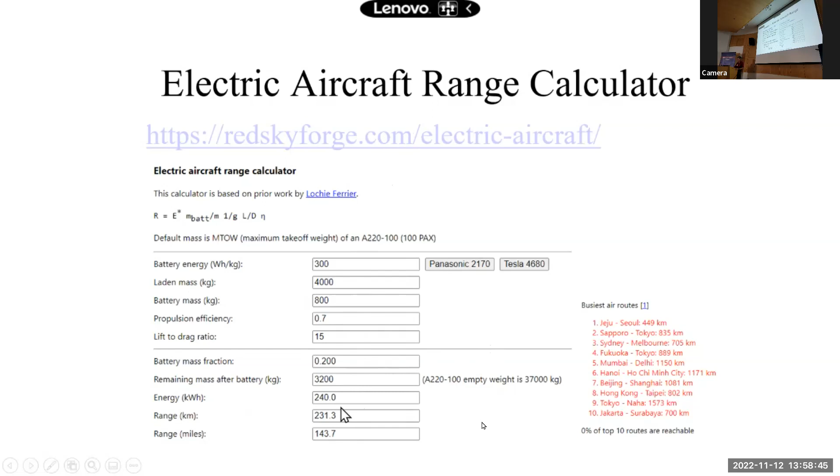For those combinations, the range is 231 kilometers. Plug those in, you get 231 kilometers, which is 144 miles.

Let's see if we can recreate that using our equation. So you do this, here's our equation for range, plug in 300, 9.8 that's the gravitational constant of Earth, 0.7 the efficiency, 15 L over D, and 0.2 for battery fraction, battery over total. And you get 64.3.

This formula had logarithmic components for the mass - is it gone here? That was the one if you burned off fuel and the weight changed. The weight doesn't change here, it just comes out as a simple ratio, so it's easier for this. What's the empty mass fraction consist of? Everything except the payload and the battery.

64.3 is not 231, which is what we think the answer is. Why? Because units are crazy. Even though these are SI units, these are metric units, we still have something we got to figure out. So what do we got in here? Well, we have...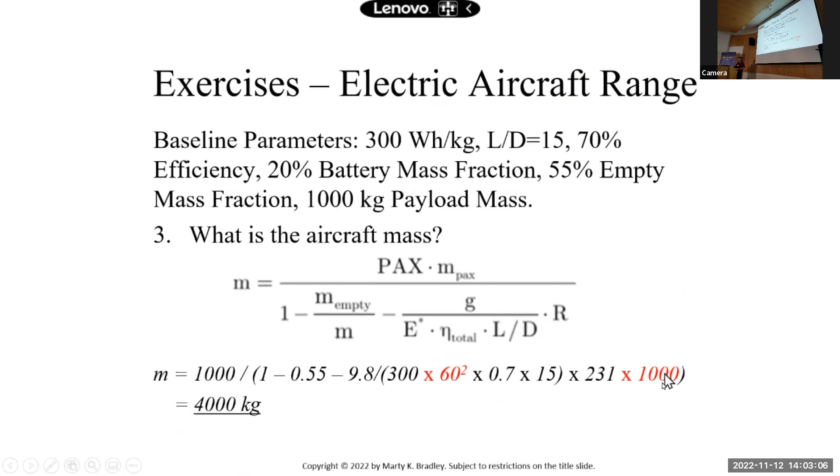If you took the payload out and replaced it with battery, what could you get? What would the range change to? You can do those calculations using something as simple as this, and you'd get 520 kilometers if you weren't carrying passengers.

So that's the kind of example that, once you have a sample, you can then change. Look at other examples—once you've got the units right in your sample, you can plug in different numbers and get the answers that you might want.

Okay, this one is about the battery. We talk about batteries, and I've been using one number, watt hours per kilogram. There are more, but that's an important number. But what does that really mean? Well, often that is a single cell of a battery having so many watt hours per kilogram.

But you have to combine it into a different package, into a module, into a true battery that you could actually put into an airplane. So you have to add weight and pieces to that, and the weight's going to go up, so the watt hours per kilogram is going to go down.

Another factor we haven't talked about: if you're familiar with batteries, typically you don't use all of the energy out of the battery. You actually save the top and bottom part of the battery's charging ability, because you want to protect the life of the battery. You want to get a certain number of cycles out of it—you don't want to drain it completely every time.

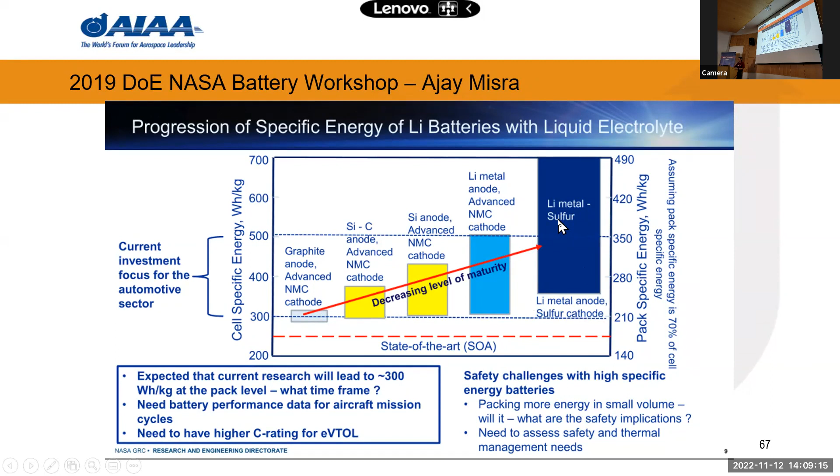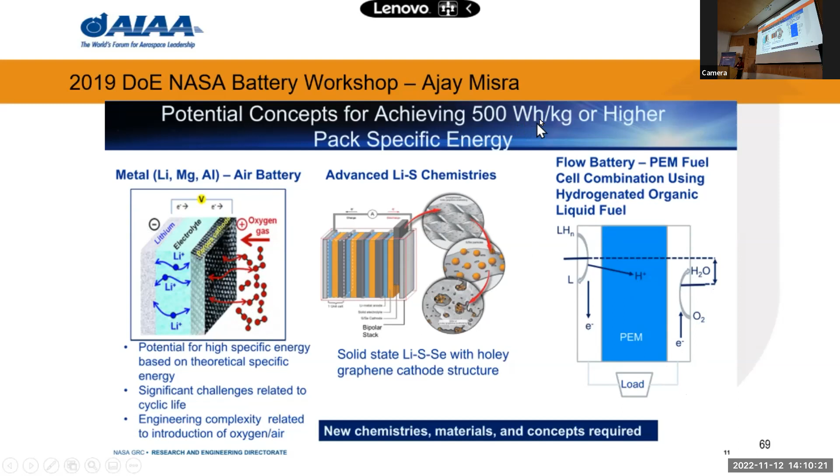Some other concepts that might be able to get to 500 or higher. Here's some metal, either lithium, magnesium, aluminum air batteries, where they actually bring in oxygen from the air, which is starting to look a lot like a fuel cell that we talked about before, but it's a battery concept. Some lithium sulfur chemistries, and this is a flow battery, which is essentially operating very much like a fuel cell. So there's some potential to get to 500. The question is how long it will take them to get to 500, and what's the potential to go beyond 500? Those are still real open questions.

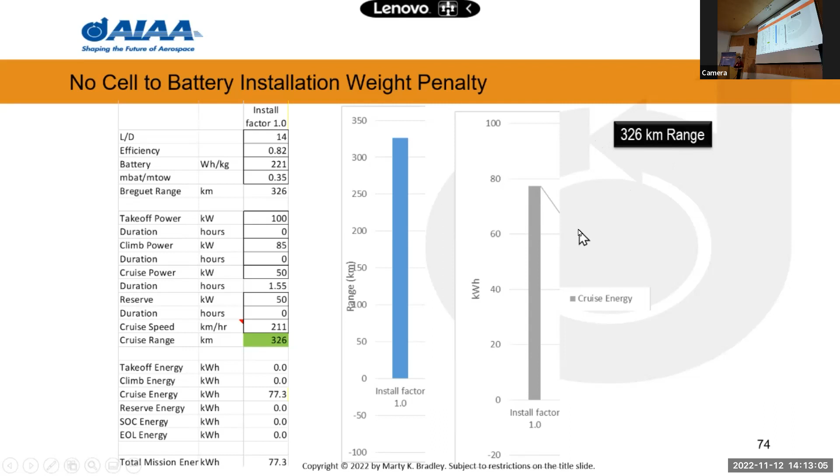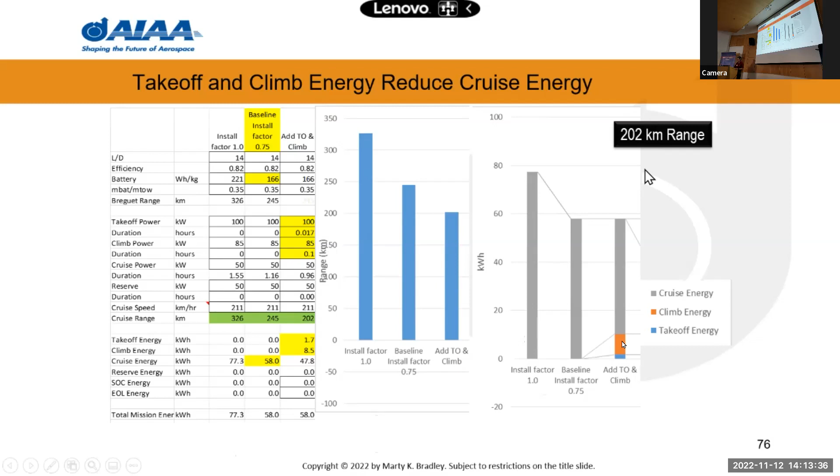However, if we include the installation weight on the battery instead of using the cell number, our range drops to 245 kilometers, which isn't too bad. You can see the amount of energy over here in gray, so it seems okay. But we had neglected the takeoff and climb energy, which assumed you were cruising. So if we add that in, we lose a little bit, there's a little energy used for that, so we're down to 202 kilometers.

An airplane typically requires a 30-minute reserve, some require more. So if we use a 30-minute reserve, we have to have enough energy to cruise for 30 more minutes to an alternate airport. Over here, it looks like about 35% or so of the energy is just sitting in reserve, we can't use it. So our effective range of our little mission drops to 96 kilometers. That's starting to not get you very far.

Oh yeah, we forgot that 10% top, 10% bottom we don't want to use, and if we take that out and put that in here, we're down to 47 kilometers. We say, oh well, it's not a brand new battery, it's 10% down, so our range is down to 23 kilometers. That's not very much.

Then, if we say let's not do a conventional airplane, let's do a vertical takeoff airplane, like an air taxi, we plug those numbers in, make a couple of adjustments for weight and a little bit on drag, we have negative range. So we eat into the reserve just to even bother taking off. We actually change the reserve to be less, but we don't have an airplane that works. So at these kinds of assumptions, I don't have any airplanes that would do anything with. This doesn't look good.

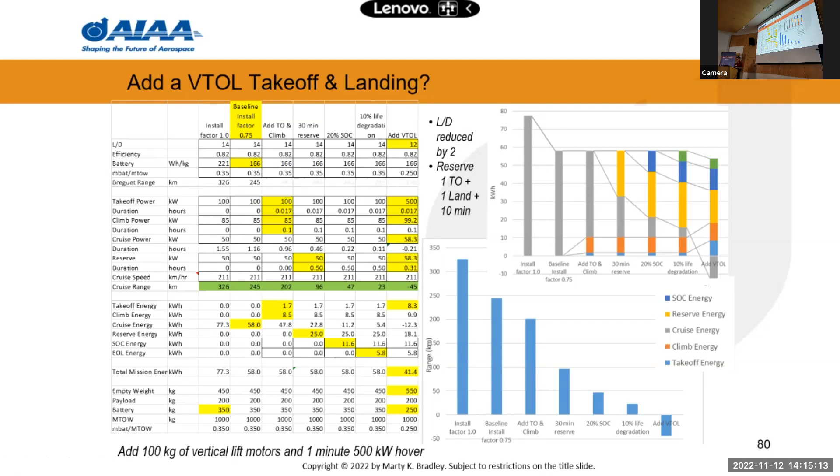Now, if you have better batteries, like 400 watt-hours per kilogram instead of 221, our conventional airplane is back to having a 200-kilometer range. And even our vertical takeoff airplane can now go 70 kilometers, so that can get you from one side of town to the other. This is actually not too bad. If you can improve the aerodynamics of the airplane to 20 instead of 14, which in itself is pretty hard, we can get up to 350 and 150 kilometers. So there's potential here, but you can see how the assumptions and the available battery-specific energy can make your concept practical or completely infeasible.

This is the kind of thing that you need to do if you're running an investment company and they're asking you to invest $50 million in developing a new electric airplane. Somebody needs to be running these kinds of calculations to see if they're telling you the truth about what the airplane is.

This is just going back to that same chart showing the trend. This is what we essentially created, we did a couple of examples.

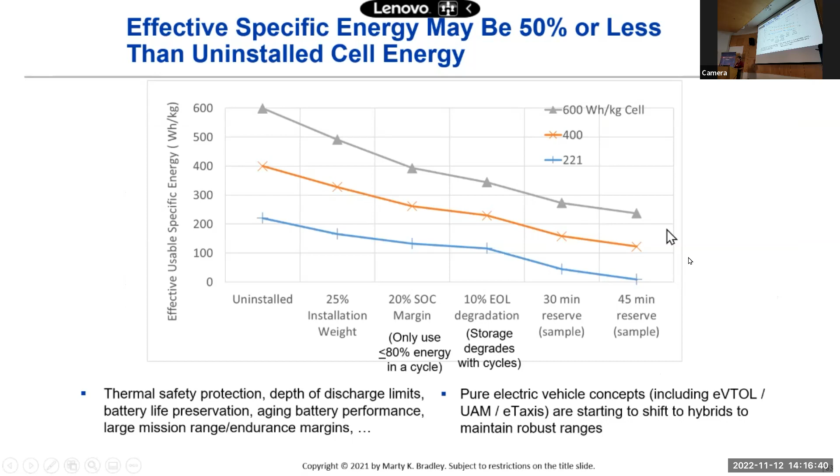Infrastructure is also a big deal, we talked about it a little bit in the morning. Airports have electric power, but they have the kind of electric power that you might have in your garage. They don't have the kind of electric power set up that you might need to charge some of these airplanes. When you buy an electric car, you often have to install a special outlet in your house, you may have to put some extra circuit breakers, you may need an extra dedicated line to power your electric car. And only the smallest of airplanes are going to use the kind of power and energy that your car does.

Anything that's beyond the smallest airplane is going to use more power, going to want more power than even the cars. Actually, more like one of the big electric trucks that they're developing. And so airports are going to have to change if they electrify, right? And so that's a big deal.

The airports are doing studies to figure out what they need to do to accommodate electric and hydrogen-electric airplanes, so they're coming up with plans of what they might need to do. The community is trying to work with the ground transportation people, trying to get some standardization of plugs and different things like that. But if we ever electrify large airplanes, we're going to need our own and even bigger plugs than they use in trucks. So a lot of activity potentially in order to make that happen.

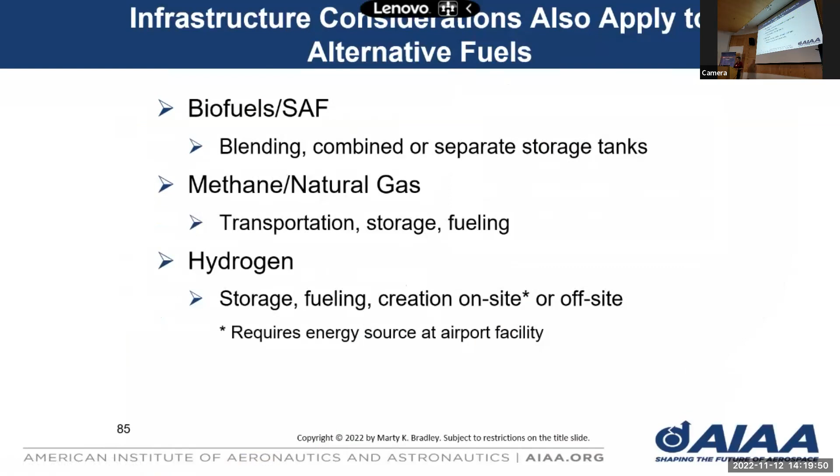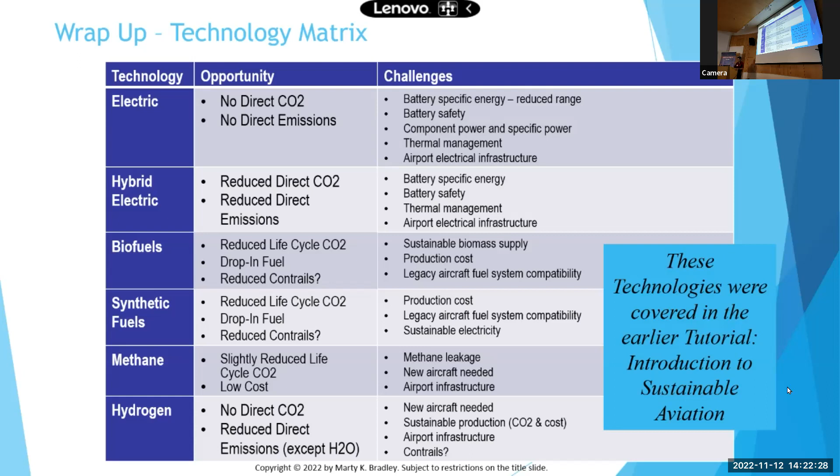I think our short courses get into more detail than you will find in any of the academic textbooks. Academia is starting to catch up.

We're doing okay on time. I'm going to play this video. This is going to work. This is a video that Airbus did several years ago. It actually won awards for industrial video production or something. So it's cartoonish, but it's actually got some good content in it. I'm going to play it and go through it a little bit. It talks about the history of aviation and how it is evolving toward electric and hybrid electric propulsion, and how it needs to work with aircraft regulators. I'm going to play this, if it works, and I'll turn it over to questions.

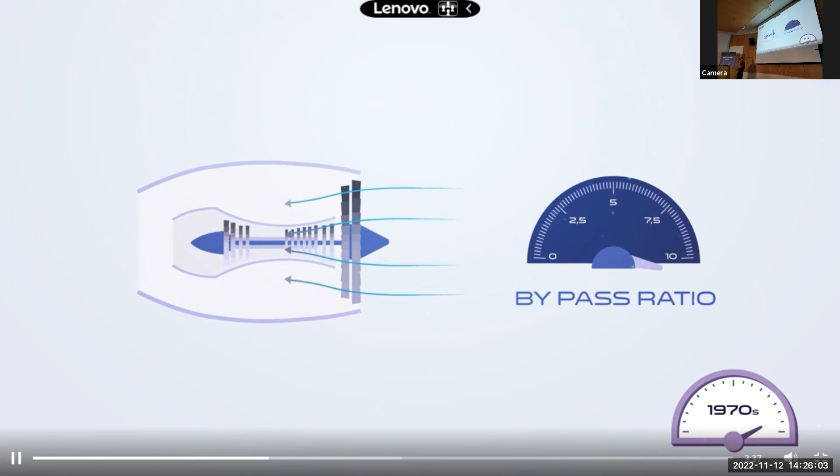The introduction of the turbofan in aircraft improved efficiency and reduced noise for better cabin comfort. The fan is coupled to a gas turbine to split thrust between the fan and the high-speed air jet. 80% of the thrust is provided by the fan. Efforts to improve efficiency and reduce noise led to an increase of the mass flow through the fan and a decrease of the mass flow through the core of the gas turbine. Increasing the bypass ratio has allowed the improvement of engine efficiency and therefore aircraft operating costs. Coupled with huge advances in aircraft design, these propulsion system improvements have enabled airlines to create business models that significantly lowered ticket prices, thereby democratizing air travel and also substantially decreasing aircraft fuel burn and CO2 emissions. Since the start of the jet age in 1950, this reduction has reached 80% per seat.

Now that we know the past, let's see what the future holds. Today, one of our airplanes takes off or lands every 2 seconds. The number of passengers transported by air each year has reached 4 billion. Air traffic will double in the next 15 years. Faced with these new challenges, Airbus is researching technologies which further improve the sustainability of our products and strives to develop next-generation technologies to reduce our carbon footprint by 50% in 2050 compared to 2005.

The third propulsion revolution. Right, that was the old goal of 50% reduction by 2050. Now, they've imposed on everyone 100% reduction, net zero carbon.

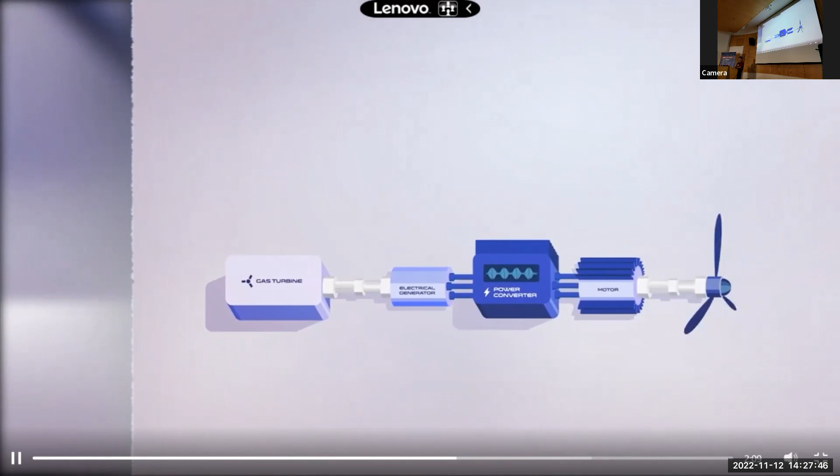Has begun. It's not a dream, it's a reality for the future. Our teams are working on several new propulsion architectures. Among them, serial hybrid electric propulsion consists of a fuel-powered gas turbine providing power to an electrical generator to produce electricity. This electrical power is then converted to power a motor that drives a propeller or fan to provide the requested thrust. Parallel hybrid electric propulsion is based on turbofan technology. The fan can be driven by the turbo engine, by an electric motor, or by both at the same time. Like the serial hybrid propulsion architecture, the electrical energy drawn by the motor can be provided by a fueled generator. Batteries may also be used in such architecture. The full electrical architecture does not include an electrical generator nor a gas turbine. The energy provided to the motor is stored in a battery.

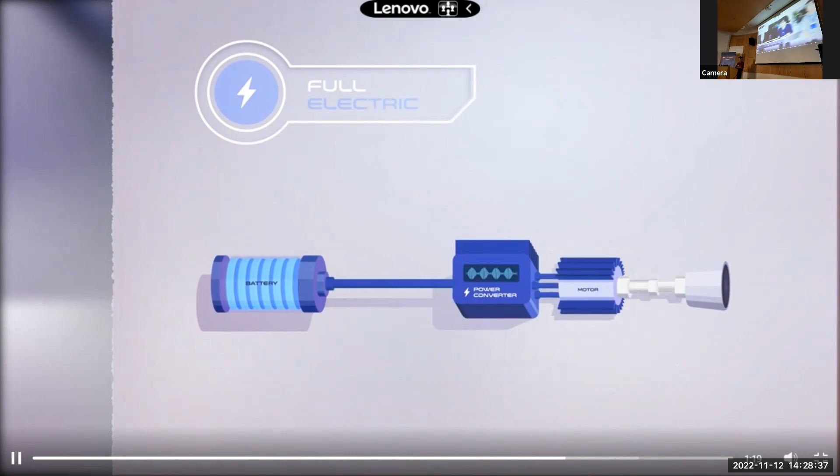These technological breakthroughs will improve sustainability. Enabling this third revolution in aviation will require new ways of collaborating among airframers, engine manufacturers, and system suppliers. An airplane is only allowed to fly if it meets a set of requirements imposed by authorities. All aircraft are subject to these rules and their associated acceptable means of compliance. However, these methods were developed in the context of traditional architectures. Does the introduction of hybrid electric propulsion make them obsolete? As representatives of the industry, we have an opportunity to work together to establish methods that are suitable to introduce hybrid electric propulsion architectures in our aircraft in compliance with airworthiness regulations. Together, let's make the third revolution a reality.

Okay, interesting. So I thought the little video at the end, it's a little cartoonish. In some ways, it summarizes some of the things that we went over today.